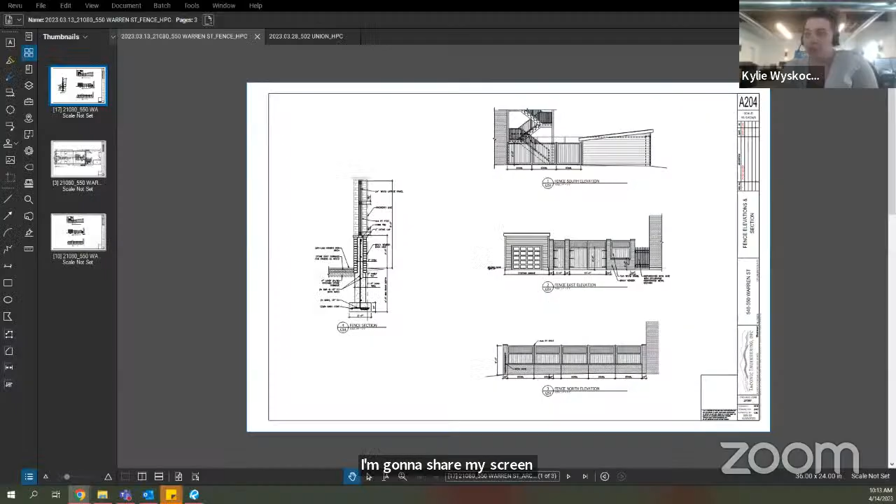That's unusual. Okay, tell us about the fence. I'm going to share my screen. So this was previously approved. The previously approved fence was brick and wood panels. This gate was in a separate approval. It's going to be the same footprint. We're just switching from this brick and wood detail, let me show you the footprint here. It's going to be the same footprint all the way around the backyard, but now it's going to be all wood.

So on this side, it was brick with a wood topper? Yep, okay. So it'll be wood from the building to the garage with no lattice. On the rear, it'll be 6 feet of wood with 2 feet of open lattice at the top, same design and pattern as before. And then same thing along the alley on the other side.

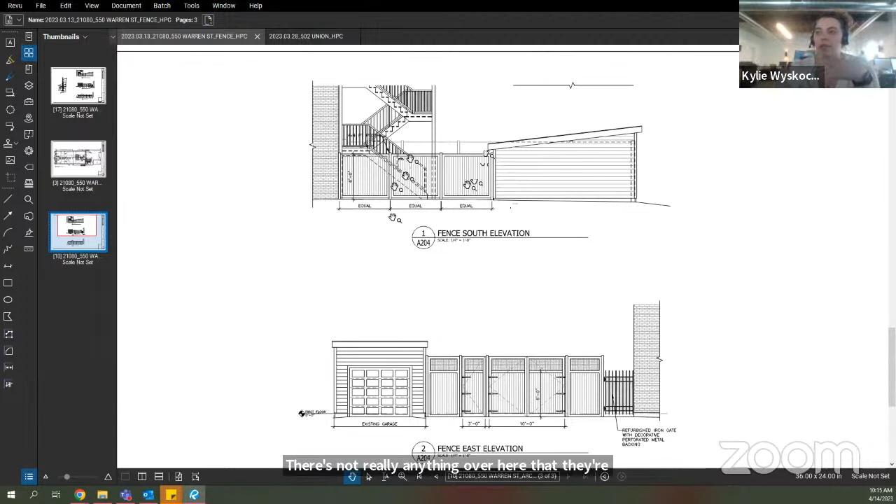I don't have a problem with it, I just have a curious question. Why is it 2 different elevations of fence type? Without the lattice, with the lattice? It's just in the height change. Just a curious question, because it'll interfere with the eave on the garage. Also, there's not really anything over here that they're trying to get extra privacy from. The neighboring property also has a fence that's pretty high over here. And the height is the same, consistent for the elevation.

The lattice is the only difference, right? Yes. Yep, same material on the bottom, all the way around. Any other questions or concerns?

If not, may I have a motion to find the application complete? Hugh and Miranda, all in favor? Aye. Motion to waive a public hearing and request the city attorney to prepare a COA. Kim and John. All in favor? Aye. Any opposed? None. Approved.

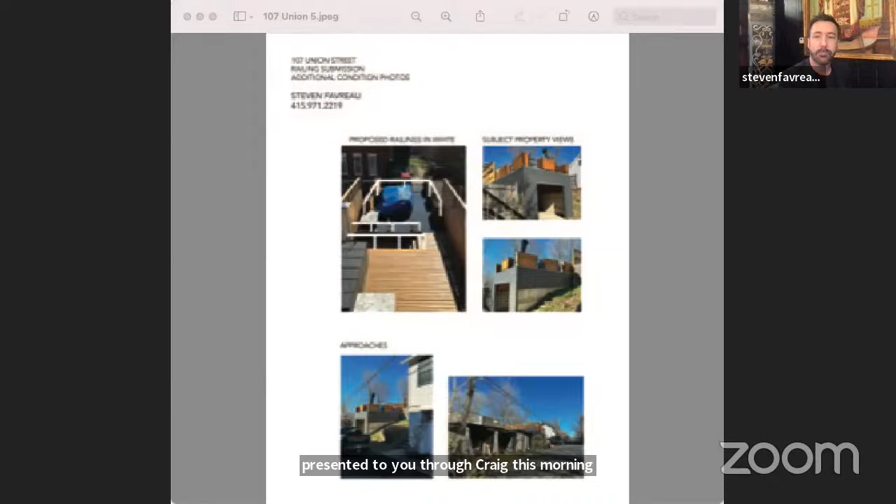So we had an engineer come out, Chad Lindbergh, and we have this plan that I've presented to you through Craig this morning. Can you zoom in a little bit? I'm sharing a screen here. Is this the page you want shared? You should have two pages that illustrate what we want to do in the back.

I think this might be the second one. There's also a line drawing. Is it page 4? Oh, yes.

Is there glass between those panels? What's between the poles? Oh, you're looking at the photographs? We're looking at the drawing right now. What are the materials? That's why I was asking about that line drawing page.

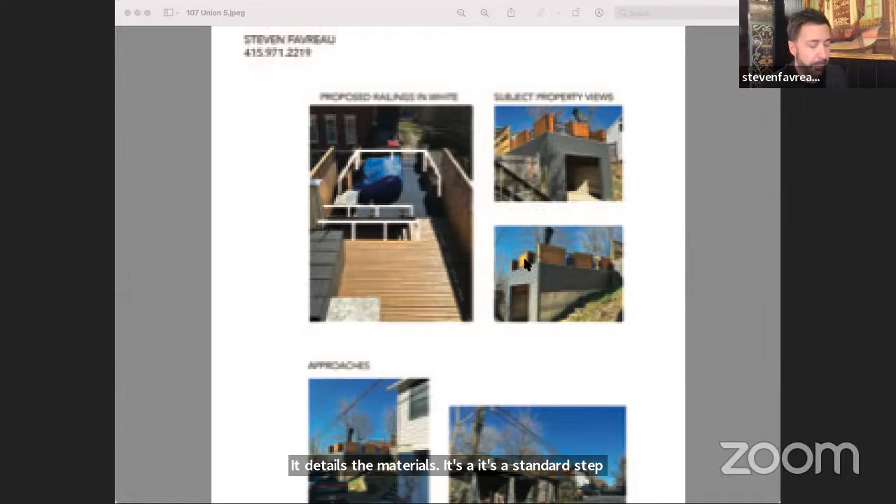It details the materials. It's a standard steel post and rail with steel cables stretched between them. There you go.

And the building is located where, approximate to the street? It's 107 Union, and this is the garage that's on the back, Cherry Alley. Yes, you were close.

No comments? Can you see the photos again, please? Just trying to understand what I'm looking at. Sorry, just a second.

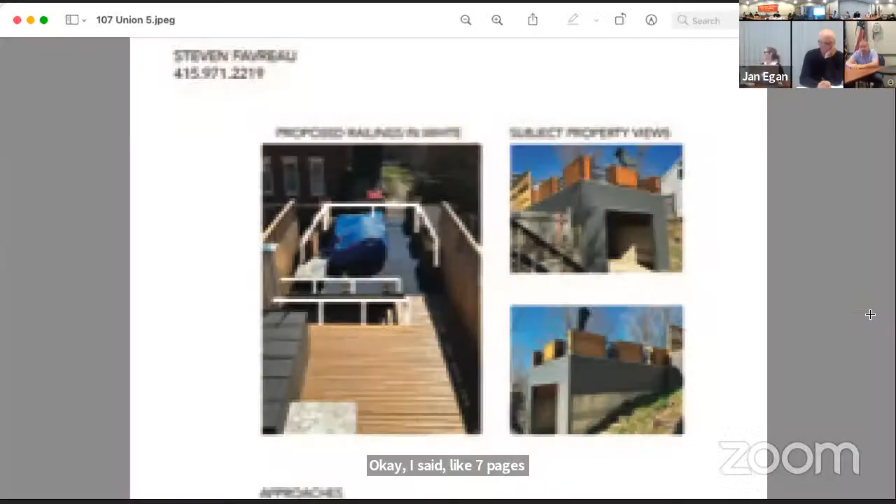They sent like 7 pages of this. Can you enlarge that one right there? Let me just... yes, okay, so it's not just the screen, it's low res.

Yeah, it's their suggestion. So what you're looking at there, on the right top corner, the gray building, that's the actual garage, and the brown planters above it were placed there as guards. We had actually stopped them and told them they can't do that, they have to create a rail. So on the left of that is what the rail is actually going to be.

I got it. And the material - they're going to put in a 36-inch high post with cable guards, we'll call them, 4 inches apart from each post. And it'll be white or black? Black. And the planters go away? That's right, everything you see in those photographs would be gone.

Good. So there's a staircase going up there with railings along the sides of the staircase, and also a railing around the edge of the garage, correct? Correct.

I think I would ask for the application to be submitted in higher resolution, because I can't read a lot of the text, and it's important to be able to read the text of the application. Well, I'm happy to walk you through it. That's what I'm looking at - I can't read what I'm in. Is my copy just bad that I got?

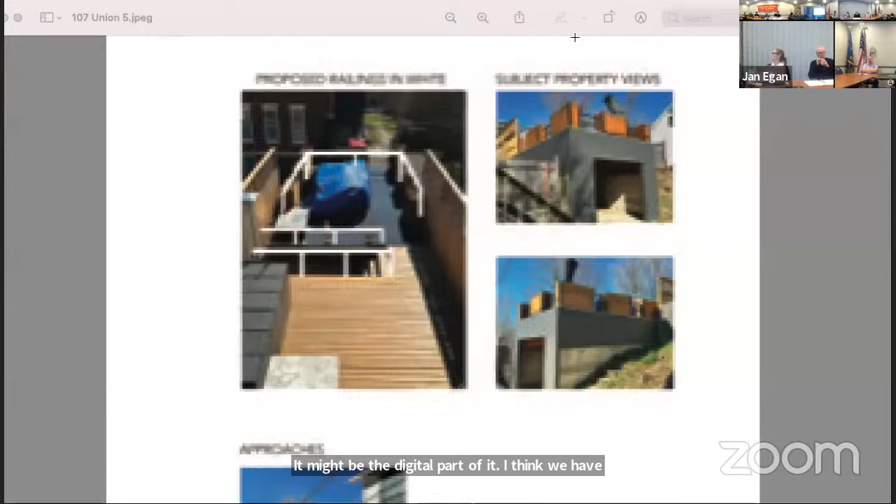It might be the digital part of it. I think we have it in our office - you have it where it's clear? A hard copy, okay, and we could always photocopy it. That's fine, I just wanted to make sure it was readable, since mine is not at all.

Okay, so the cables - there's a railing at the top and horizontal cables running between the posts. Are the cables black as well? They're more like a dark gray steel.

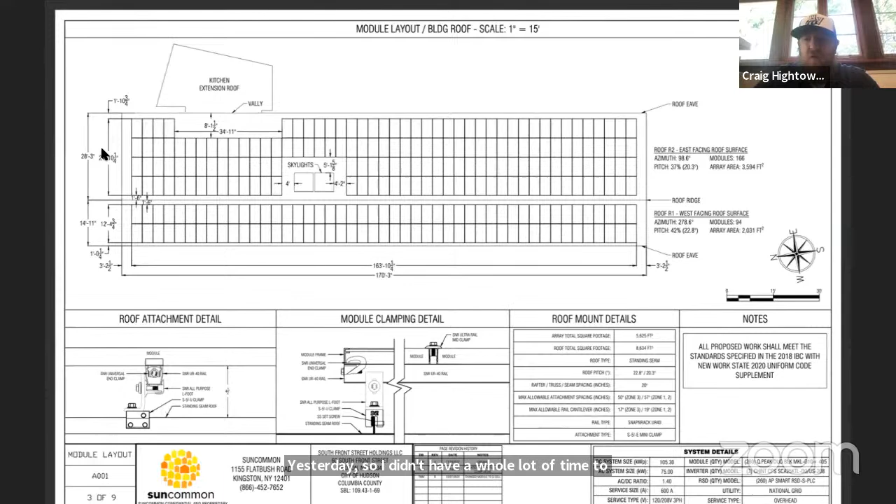No, I'm sure there is, but not that I have packaged up for this. It kind of landed in my lap about 4 p.m. yesterday, so I didn't have a whole lot of time to put everything together. I'm sure I can get one put together, but I don't have one at this moment. In the package I emailed, there is one in there.

Okay, next page. I mean, I think the commission has been historically friendly to solar panels. Over and over again, it's legitimate to understand what, for all the good we're doing, if there's anything bad at the same time. At the end of the day, we end up approving the solar, but the street view is going to be helpful.

Yeah, and I would want to just make sure that they're not reflective, being such a big plane that's huge for the neighbor. If you're looking towards the water that way, that they're not going to reflect back. I think typically they do not, but— Yeah, no, they're not, and that's an FAA requirement also, that solar modules are built with anti-glare materials. So these particular modules are black, they don't have any white coloring in them whatsoever, but they are absolutely anti-reflective.

This was the one that I emailed that was difficult to open. Yes, I have, so there were 7 or 8 documents, 9 documents. I mean, this is the building, here, this one's yours, and that one around, you can just hand it around. That's pre-renovation, that's the same. Oh I see, okay, it's a different roof now, but it's relatively low building, so it's visible. Okay, that kind of was the question.

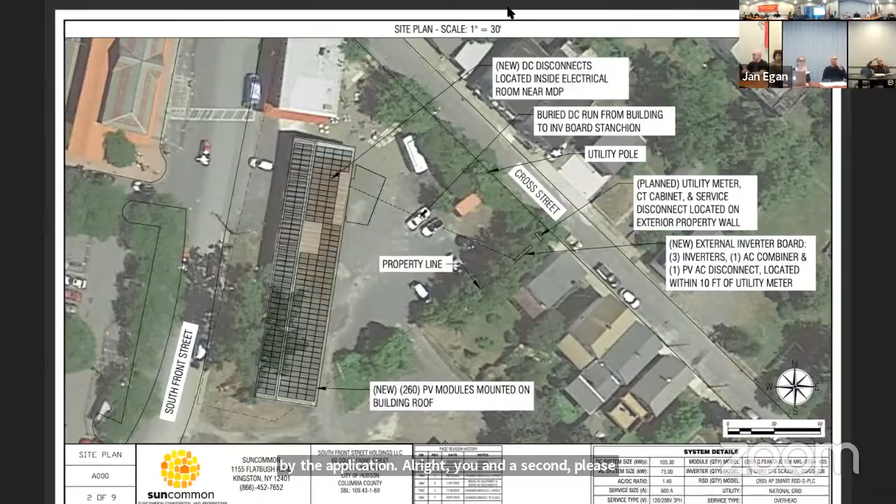Is it complete without that rendering? I think so. I think we understand this is going to follow the shape of the existing roof, and it will be visible. We asked about glare, which was asked and answered. I don't know what else is going to change. It'll be apparent to everyone that the roof is covered with solar panels. It's not going to be concealed in any way. There's no way to conceal it or give it a modern look given the relationship there.

If it's helpful, there is a page of what they look like.

So the first one, won't that be flat? There's a photo of them on other buildings. I think I know which one you guys are talking about. Yeah, it's this image here.

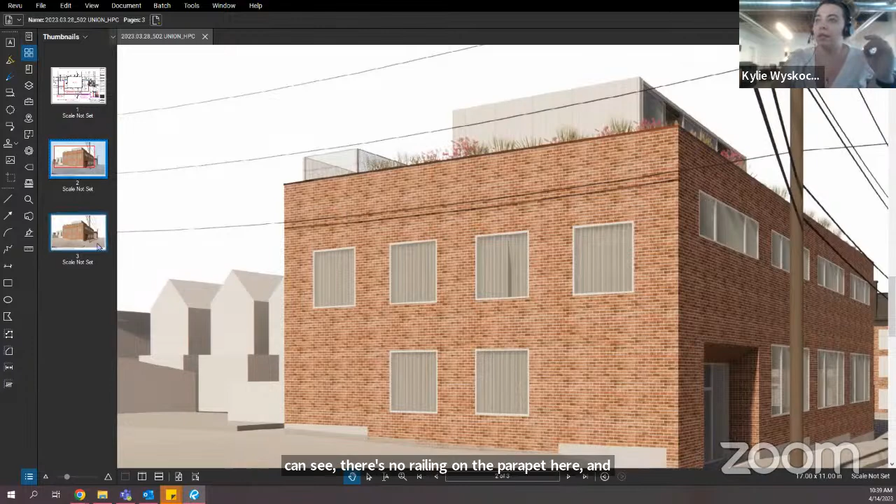So this was the previously approved rendering. As you can see, there's no railing on the parapet here, and you can see the green roof vegetation. This would be the new railing. It sits right on the inside of the parapet.

What is the railing? It's the same as it was before. It's just the metal rail, and then it's got the horizontal cables in between.

What's changed? Just the location of the railing on the roof. So originally it was set on the inside of the green roof. Now we're moving it to the outside of the green roof, and it's attached to the parapet, to the edge of the roof.

That's it? That's the only change is location? Yep, so same material, same height. It's just moving from the inside to the outside, so there's further coverage around the entire roof deck.

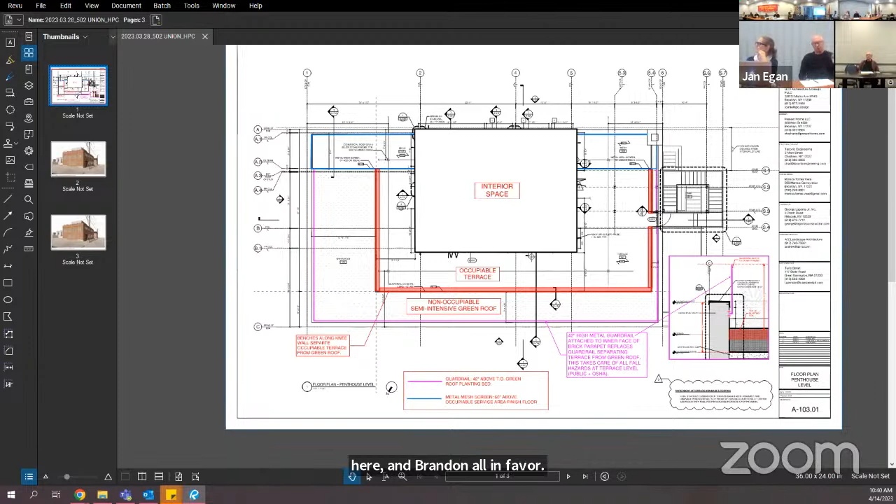I think we're good. Motion to find the application complete, by you and Miranda. All in favor, aye, none opposed. Motion to waive the public hearing, request the city attorney to do today. And Kim and John, all in favor, any opposed, approved.

Same thing as I tried to say before, two weeks. We vote on the certificate, and you should get that from Craig. We vote at our next meeting. Thank you. Awesome, thank you.

354 Allen. Hi. Hi. Hi. I'm Lithe Sebesta, and I'm presenting for the owner, Nicole Cherubini.

A proposed exterior renovation and the removal of a porch and deck stairs from the upper story and the reconstruction of a mudroom, all on the alley side. Do you want me to show you contemporary photographs first? If you could start with photos and get a sense of location and neighborhood, that would be a great way to begin. Okay, wonderful.

Here are the photographs from the front side of the house. It's on Allen Street between 3rd and 4th. The front facade of the house would remain untouched, with the exception of the replacement of the windows, which are in need of repair.

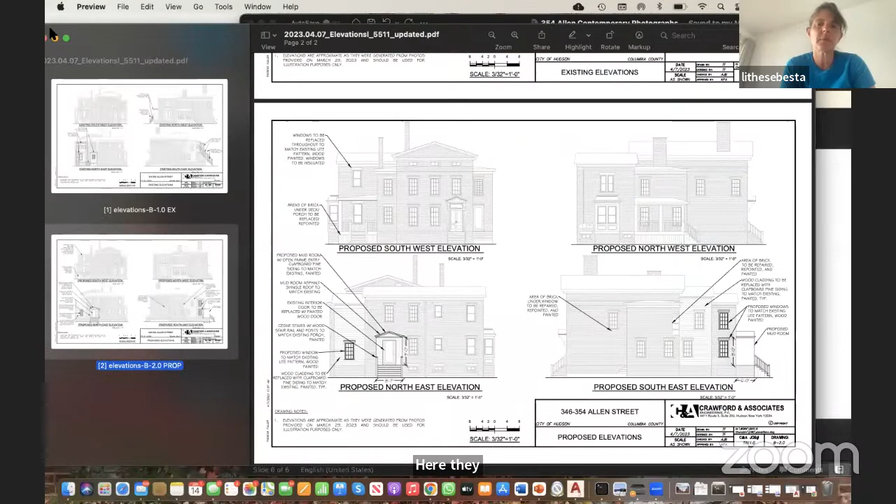Here they are. Let me zoom in on the existing elevations. This would remain as is, with just a replacement of windows with a matching light pattern.

The same would be true of this facade, save this mudroom, which currently has a side entry and was likely built on at the beginning of the 20th century. It also has some foundation issues. This is the existing mudroom configuration, and this is what I'm calling the bump out with the exterior deck.

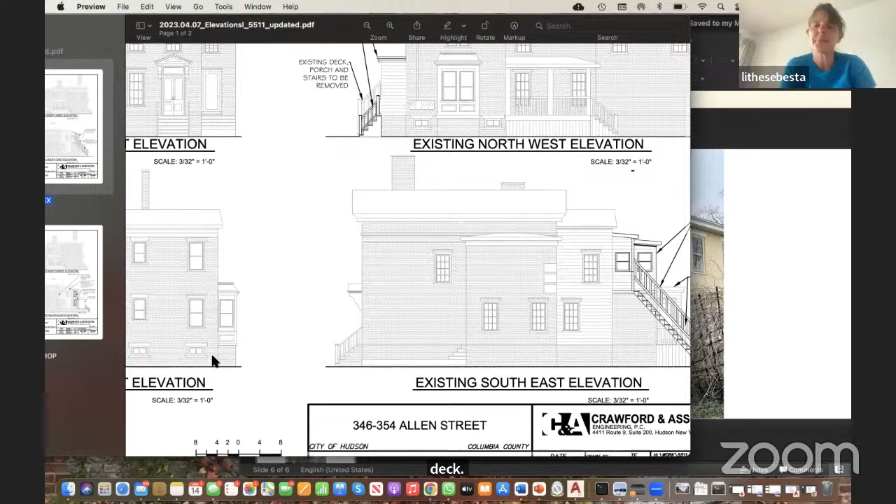So when you mentioned replacing windows, you're replacing windows throughout the entire building? Yes. And when you said you're going to match the existing lights, it's not just the mullions and the muntins—they will appear as they are now, just modern windows? That's of course very important to us, that it's replace like for like.

Those windows, I can't tell from this distance, are they 2 over 2? No, they're 6 over 6. So there's a portion of the house that is 6 over 6, and a portion that is single hung. They'll be replaced to match existing.

Replaced to match existing, I understand. So just for confirmation, if it's 1 over 1, it'll be 1 over 1. And if it's 6 over 6...

Exactly. And when you say replacement, are they full replacement windows that you're going to install there, to Kim's point? Correct. So you're not modifying the opening to accommodate the replacement windows? No, same opening, same size, same light pattern. Wooden, painted to match. There are simply long-term significant heating and cooling issues in the house as a result of windows that are not functional. So it's an opportunity to upgrade but maintain historical correctness.

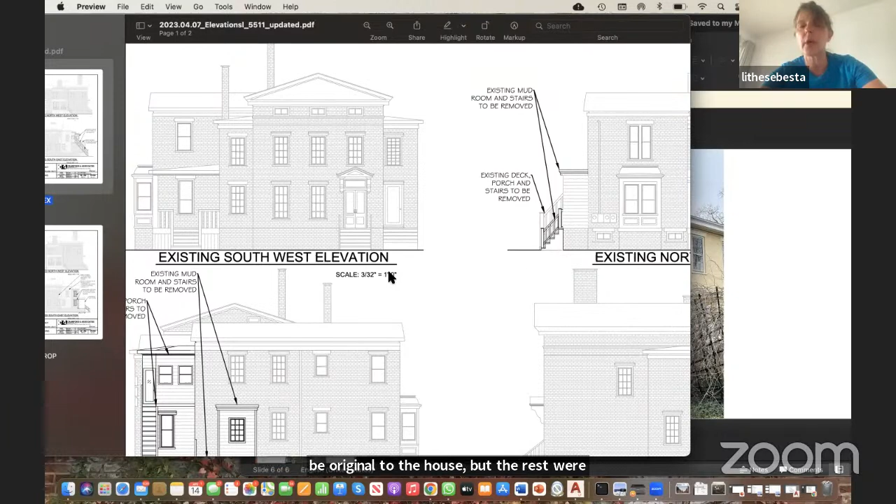That's interesting, because the double hung 1 over 1s—you have the opportunity to have them be 6 over 6s, if the originals are 6 over 6. Exactly, yes. So my question is, what is the condition of those? I think we need to evaluate them separately, right?

So if there's original windows—we very much understand the importance of the environmental impact to the house of having new windows, it's great, but there are other things to do. So have you evaluated the condition of those original windows to determine if it's an option for repair?

Yes. I could jump in right now, sorry. I just wanted to talk about when we first did the work on the house, we repaired each pane. This is Nicole Cherubini, I'm the owner.

It's a very hard thing for me to think about losing these gorgeous windows, and I agree that if we could save them, we would. We have done extraordinary measures to try to keep them, and heating the house is incredibly hard. This was not an easy decision to come by.

Have you considered storms for the front? There are many excellent storm windows that can go over these windows and give you a better heating opportunity in the winter.

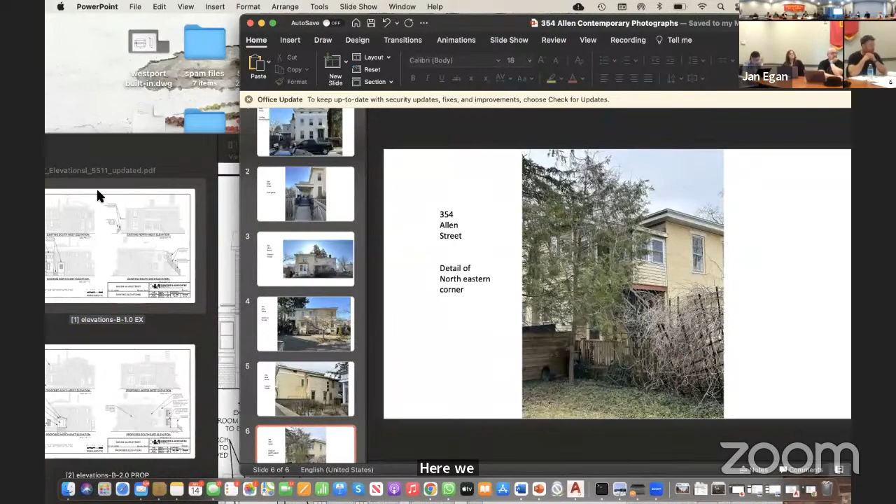As you can see, this is not an original window. But the facade of the house, which I show here, you can see these are.

As John mentioned, there are a lot of different kinds of storm windows, including ones that are single pane with a push-awning out style that you can open. There's a good example of that on South Fifth Street. And on Union, isn't there a good house that has those as well?

The house next to mine doesn't use that. Oh, they don't. John, on South Fifth, just around the corner.

Was that clear what the commissioners were saying, that for storm windows, single pane, many are available with a hinge and push out? Yes, I do. So that air issue is no problem, and you get to keep your old windows, and you'd lose those triple tracks that obscure the windows. It would really be beautiful.

What about the bump out on the left? Are those original or not original? It's in the photo, sorry, I'm going to pull back the facade.

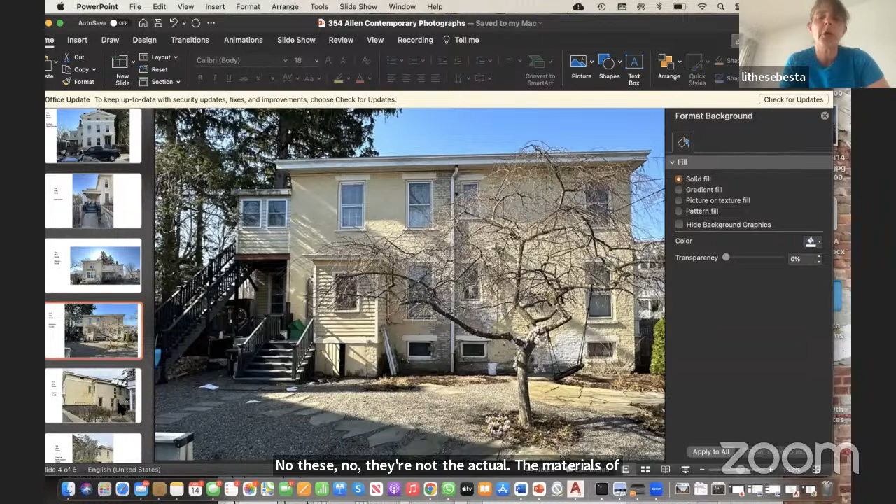Let's go back to this image - not those, this side. No, these - the materials of them are not original. The only ones that, to our knowledge, are original, meaning dating to the time of the building of the house, are the ones on the front facade. The rest were replaced higgledy-piggledy over time.

Right, the front facade is 2 planes - the 5 on the foremost plane, and then there's some setback. Are those also original? Those two you have added on - oh no, those have been replaced. So the only original windows are the 5 windows in front.

Which have been somewhat restored, and you could restore them more fully. It sounds like Nicole agrees that's a solution that would satisfy both her and your concerns. We'd love to hear from you or the homeowner that it's accurate that those are the only 5 original windows, as far as you know. As far as I know, yes.

And what about the eyebrow windows? Those are new, the ones on top, correct? Yes. When we bought the house, those were actually plywood, and we replaced them with plain white framed windows to match the rest of the house.

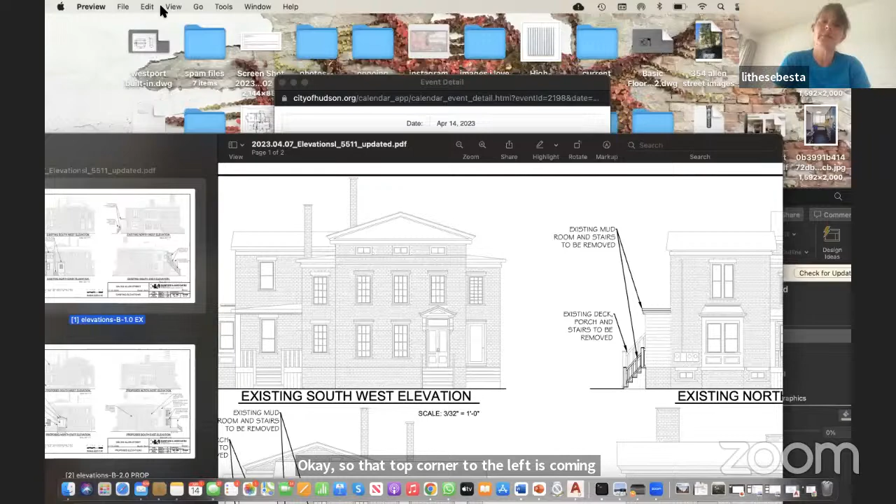So these are the existing conditions I went over before, and the new conditions would be the removal of that bump out, which you can see here. It would essentially remove the porch from this section and allow it to be reclad in wood to match existing, and to reroute and rebuild the mudroom with a more operable stair and access—shown here in a small image of the new mudroom, which has a roof profile to match the frieze at the top.

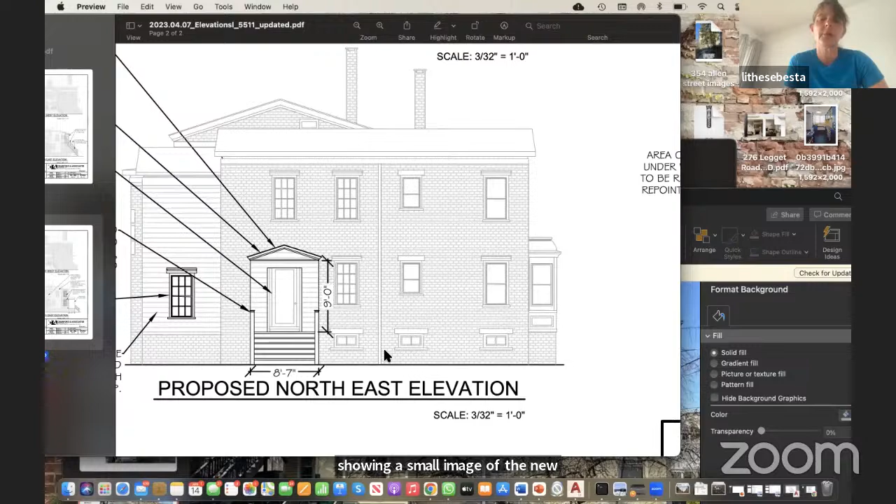Do we have specs and materials in your pack on any of the new material going on? Yep, it says essentially here: cedar stairs with a wood stair rail, and new pine wood clapboard to match, painted to match existing.

So you're not introducing quote unquote new materials that are not on the house? Nope, and no, all the materials described are wood? I beg your pardon? I'm sorry, I couldn't hear you. Everything described, the siding, stairs and stair rail, are wood?

Correct. Thank you. And then you're talking also about replacing all the windows that we see here with new windows, with similar lights, wood windows, right?

Correct. Yes, we can do that in a separate meeting or a separate application. I think the applicant said they would be agreeable moving forward simply with the bump out and the resolution of that in the stairs, and we could come back and address the windows in totality if we want, Brenda.

Sounds good on our end. So it's the demolition and the rebuilding of the mudroom? No? Yeah, correct. Demolition of the porch and stairs. Right, hang on a sec, folks.

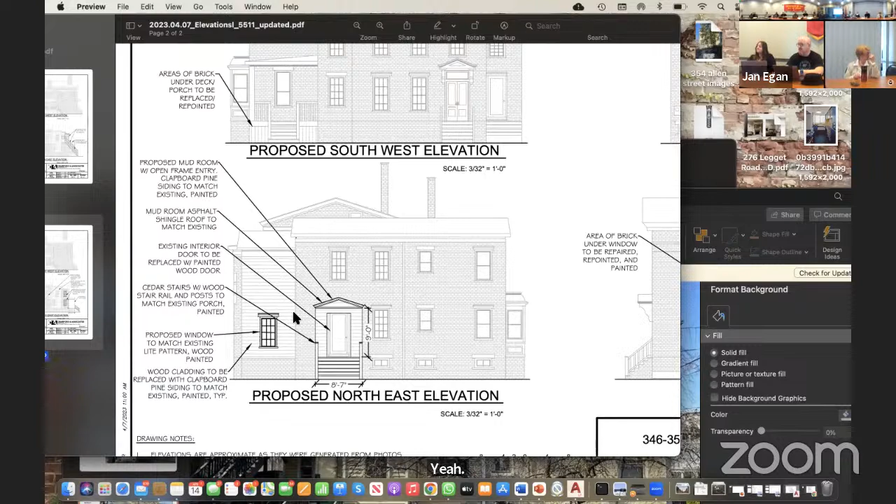The application is for the renovation of removing, rebuilding, adding and changing windows. So you can't give a Certificate of Appropriateness on this application unless you modify it to be specific to what you're approving. We do not have a detailed drawing of the construction for the add-on, we only have it for removing. So for code purposes, I need a detailed design of how we're gonna build this add-on back. We don't have that, we don't have any detail at all.

You're talking about the mudroom. The mudroom to get put back on. Isn't there also an addition where you're getting rid of the second floor thing, building something back there, that's two stories, right? No, the bump out with the porch and the stair from above is simply just being removed entirely.

So for the purpose of this, just move the demolition. We don't know what's going on, we're not talking about it, we're just taking it off, they can't do anything after that. Greg? Yeah, if that's what they wanna do, the only thing you can do is approve, because the way the code is written, you cannot do anything without approval of the C of A. So they would have to have a C of A to remove what they're requesting.

That's it, relieving pressure on the house that we're talking about. So they can't rebuild anything. Okay, is that clear where we're heading? We're saying that we could probably grant you a C of A on the demo, and that's it. You'd have to come back with more specs on what's going on.

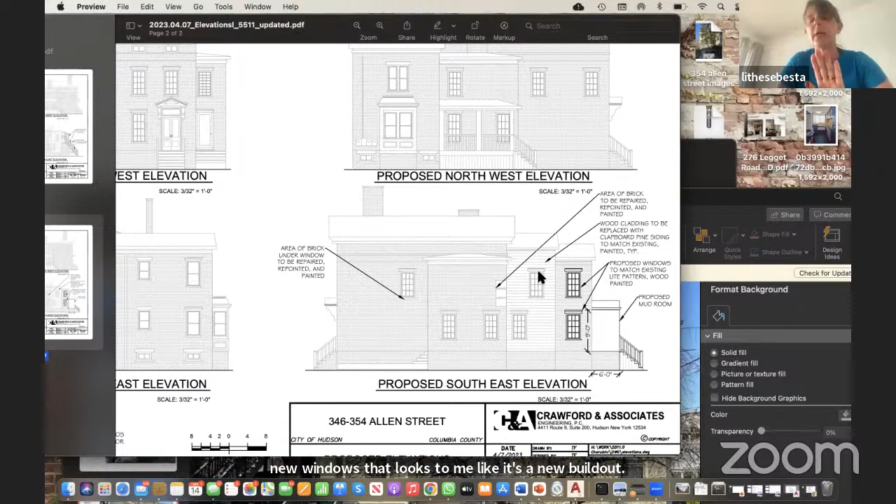Here's what's tricky about it. There are... these are all set, they're all stacked and set back slightly. So if you look at this facade, I understand why that feels funny. When you're looking at this facade, you're actually seeing this, it's actually this, if that makes sense. And this, the wooden section, is this. So this is actually the original brick section, which right now is obscured by that bump out, which comes from up here and goes down there.

Okay, I think that continuing, I follow, it's beyond, and that's why I misunderstood. So thank you for clarifying that.

Absolutely. Okay, so if you're good, we're gonna propose that in this meeting the commission is going to approve the demo and nothing but the demo. And you're gonna come back with whatever other stuff you want to do in more detail next meeting.

Sounds good. We've also collected photographs of the windows, try to get a sense of some of the other windows and how that relates to the windows in front. Okay, yep, sounds great. Thank you, thank you so much.

Well, we gotta vote. Okay guys, any further discussion? Are we setting it up? We're not setting the application complete, we're just voting on the demolition. We're voting on preparing a certificate of appropriateness for the demo only. Quick question though, mainly for Victoria, because the application that was submitted is for everything.

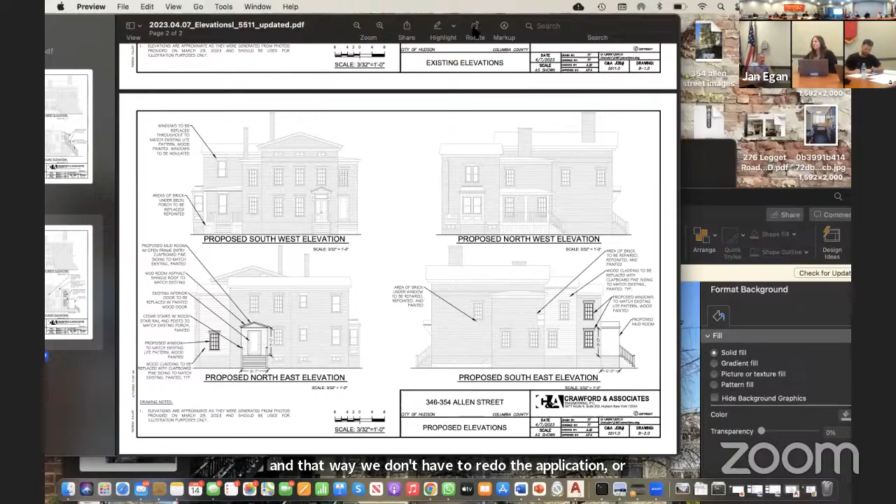That piece won't be available until two weeks. If they wanted to move forward to get that pressure off, I can approve it based on the minutes of this board. If it was an emergency, I would have had them do it before this, but that's my whole point, time is of the essence, maybe not.

That seems a kinder solution. We're asking these guys to come back with everything else. If they can go ahead with the demo, I think it's a game changer for them. But won't everyone want to just use the minutes then? Yes and no, it's a good point, but that's totally up to you. The only reason I'm saying it is because they submitted their application for everything.

If the application would have strictly said demo, we wouldn't have this conversation, it would just be a C of A for demo. So that's up to you, however you want to do it, doesn't matter to me. In the past we've done these partial ones where the applicant has to return, but if you want to issue the permit based on the board's vote, we still have to vote on it for the demolition portion. Okay, so let's take a motion on that.

Motion to go forward with the demo and the demo only. All in favor? Done, and we'll see you in two weeks.

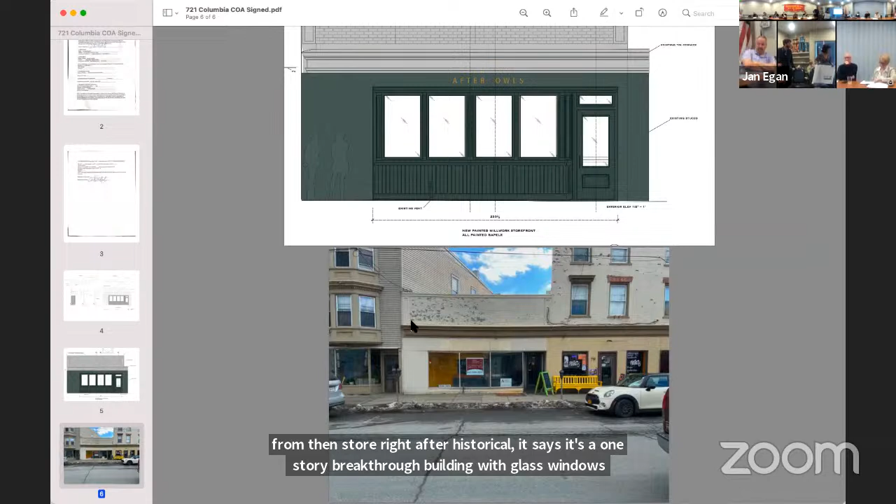This particular property is the corner building on Park Place in Columbia. It's 3 different parcels, but all attached, very popular. So it's a standalone parcel, but it's an attached row building. Very Hudson. Exactly, a Hudson moment here.

And is your proposal to paint the stucco? Well, actually, we would like to repaint it, but not like a mid-tone plain color, not the green that you see there. We'll probably be re-stuccoing, because the actual hole will be different. So there will be some re-stucco and we'll have to paint it so it looks more finished, but it will be like a mid-tone plain sort of cement color, similar to that new color.

The reason I'm asking is because it does feel like it's part of the adjacent building, and there is a datum line that stretches across it. I'm looking at that, and that's why I'm bringing up the question. Oh yeah, I mean, this does cut off here, and we show this painted, but none of this stuff is gonna be painted actually.

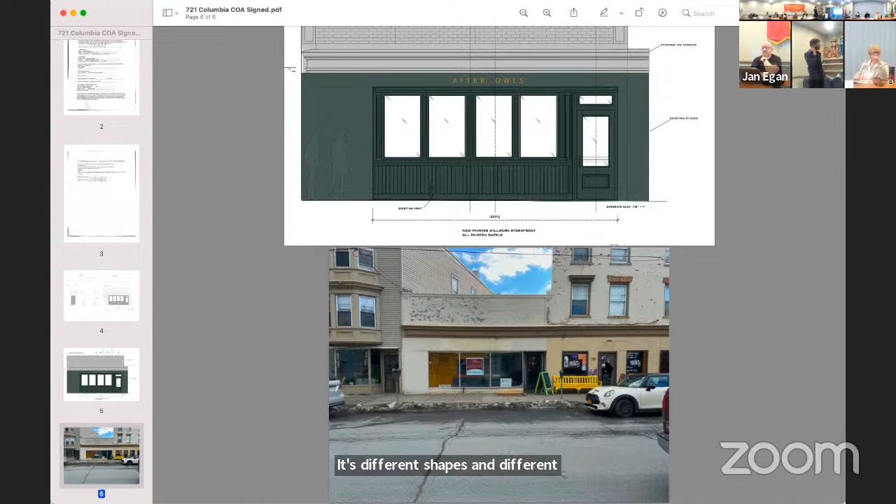If you look at the photograph in the packet, the building to the left of this one also has the bay window and the embossed wooden trim underneath the window, which - I don't think anyone thinks of that building on the left as part of this one. No, but what I'm suggesting is that this treatment with a wooden lower part of the window fits well with the building on the other side.

My question wasn't so much - I like the design, I think it's really beautiful, whoever designed it - it's just about the actual opening. I'm pointing out the height of it, because I think that's a nice datum line to see how it continues to the other building. I understand it's not related to the building on the left, but they don't read as being similar at all.

Are you talking about where the door is? No, in the photograph - the windows. Not your rendering, the photograph below. You see a natural horizontal line at the top that continues to the adjacent building on the right. There's a language to that, I think, and you see it in the cornice as well. So I'm just asking if there was an opportunity to make it the same height, that might be nice.

There's a choice to make the windows a little bit taller. How much taller do you think it is? I'll give you - we have some records, but I don't know if we have the original measurements to tell you the exact original height, so...

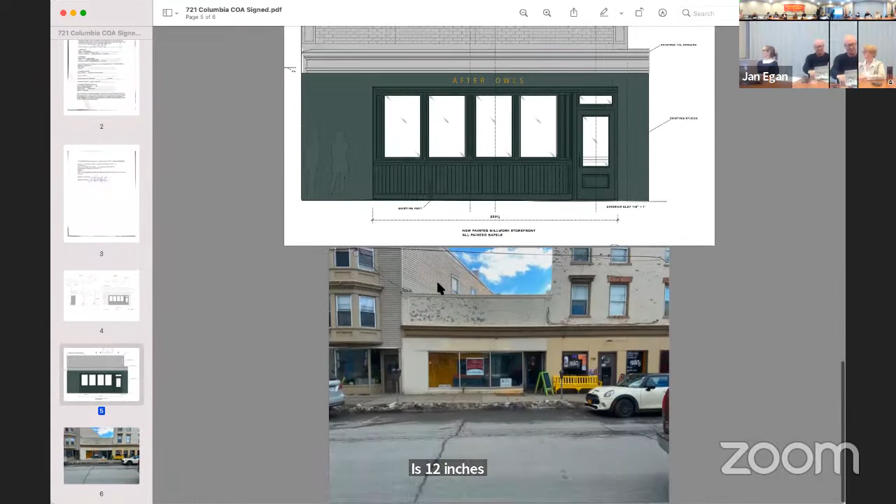It's 12 inches, 12 and 3/4 inch. So it's probably about 5 inches. I mean, 4 or 5 inches.

I don't know if there's something to stake a flag in the ground about, it was just an observation to create conversation. The existing window frames right now are metal, aluminum maybe. I would say they're a strong metal. And you're going to all wood frames with trim.

Single pane glass? All I know is that it's going to be tempered. Reading across horizontally, will there still be 3 or 4 different panes? There'll be 4.

Does anybody care enormously that the roof line, the window line, is no longer going to be consistent? It's not, I don't think I care. It's a separate building, it's a better design, we're in keeping with 1850 rather than 1959. Significantly better. The architecture has changed, so you don't even relate them. And that building next door is slated to be redone.

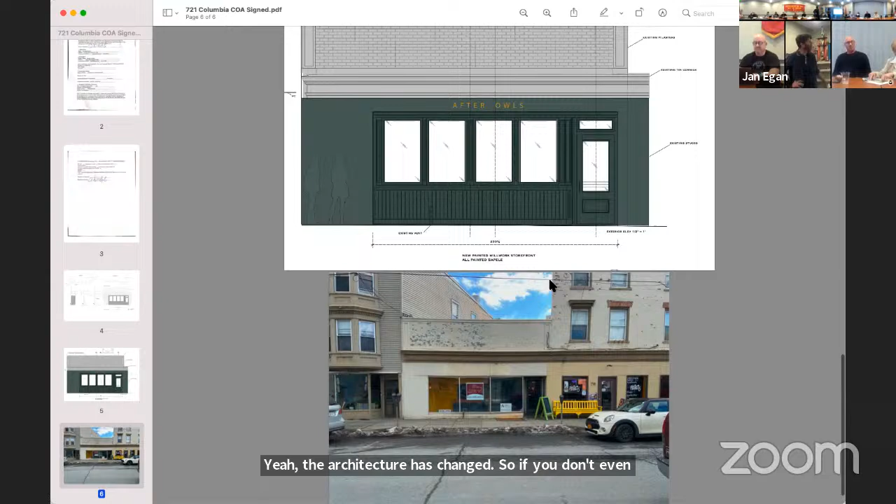Well, I think this application is complete. And you're keeping the cornice, yeah, and the high pilasters above the cornice. And the top part, we'll just redo it so it looks true to the original. Motion on the application, complete. I'll make it, Craig, seconds. Craig.

And what is, After Owls? Oh, I didn't see the sign, it's changing. Nice, I like the sign. Is there a sign in this? So we look at that. These are the brass letters that are going to be installed.

No lighting? Oh yes, we want to have just a drop down pendant, like a globe, an antique globe, over the door, to call out the entrance. The door, it's hard to see in this picture, but the door's not flush with the side, it's set back.

4 feet, 3 feet recessed. Could they bring us a picture of that lamp and we could approve that? We have it, we can show you. The sign won't be lit, no.

There might be, we might apply for additional signage down the line. I understand, but the brass letters on the wall are not a problem.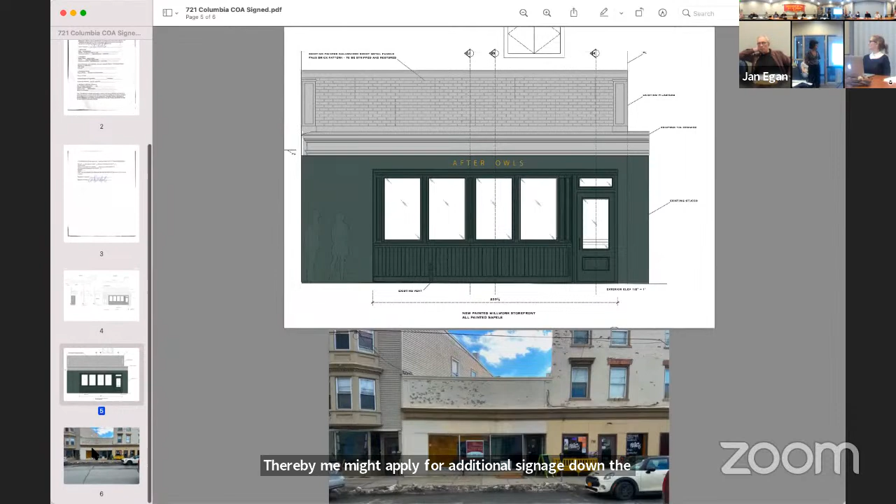I vote yes, whatever we're voting. Assuming there's no problem with it when it comes in, we have a motion, the application is complete. Miranda, all in favor, aye. And a motion to waive the public hearing and ask the city attorney to prepare a COA, assuming there's no problem with the land. Sure. Miranda, all in favor, aye. Okay, let's take a look at the land, we'll move on.

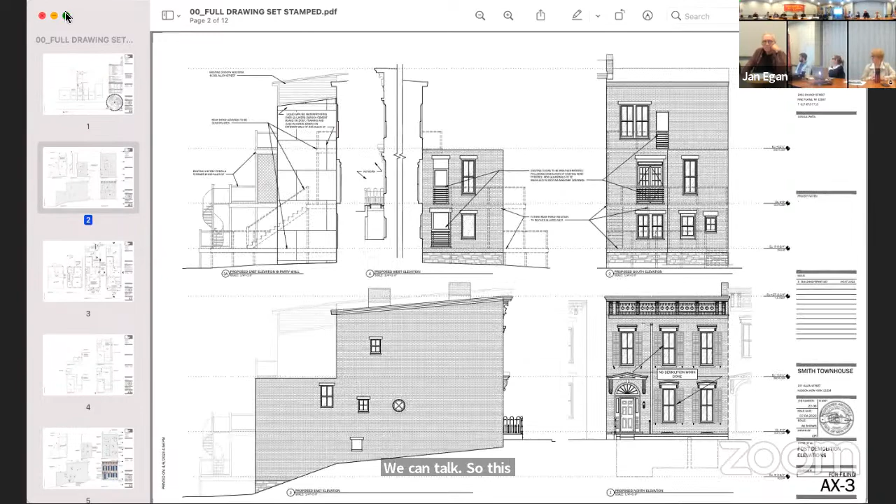Okay, so this is the existing conditions. Once we remove the rear deck, this is what's left of the facade. So we're gonna come back and show you what we'd like to do. And the front facade, we're pretty much unchanged. This is the interior package.

The house originally had an areaway on the street with a railing, so we would like to restore that. The windows actually are still down there. And we have a deck design that we'd like to show you for the rear, and a window strategy. So it's the door, the areaway, the deck, and the window strategy that we're going to for this time. I guess we'll go to the next one.

I'm gonna skip this one and keep going. The facade, we'd like to clean it up here, remove that doorway, which had a fan light that was put in, must have been the 50s or something. The original door was back about 30 inches. That is still there, so we'd like to restore it and expose it back to the exterior door.

This railing is missing right here, and we're gonna need it because there's an areaway going down. Parts of it still exist, and the neighbors have parts of it, so we've identified some fragments that we can purchase to put this under.

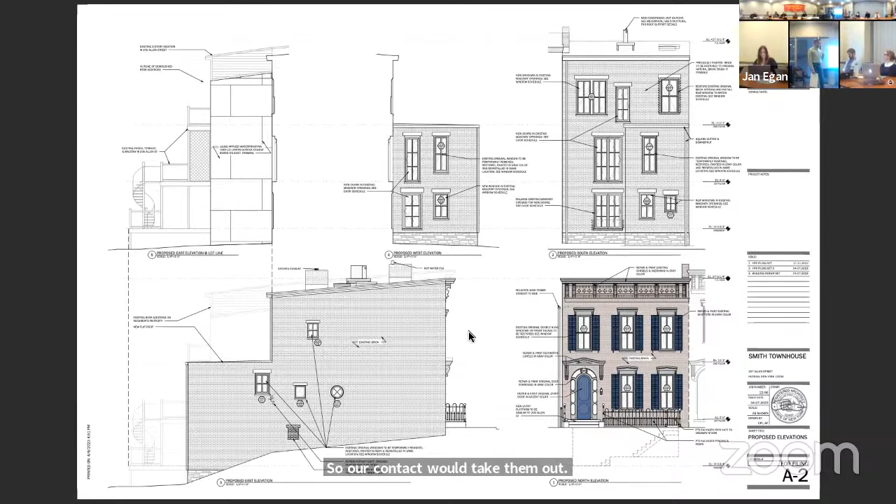This would be the window strategy on the back. The deck's not shown here because it's hard to go bigger than the deck. But about 2/3 of the windows we can restore. They're nice full wood windows with the weights. They're single glazed, so our contractor would take them out, double glaze, and bring them back. The muntins and the sash are thick enough to hold the double pane. So almost all the ones on the front will be restored.

This drawing also shows what we'd like to do for the deck. The owner would like to bring the deck out at the lowest level because it's a significant grade change in impervious here, and the rear yard comes here and drops down, and it's a really nice view, the mountains come up here. So this is a multi-level deck, which we'd like to do in steel and wood decking, and it steps back and has a staircase going up to the second level.

On the upper level, those windows, some of those were bricked in. This one was bricked in. This one is there. This one was cut to get into the rear addition, which would be removed. These are windows we'd like to drop into a French door. Same thing. So these are all pretty much there, either restoring them or putting in new ones.

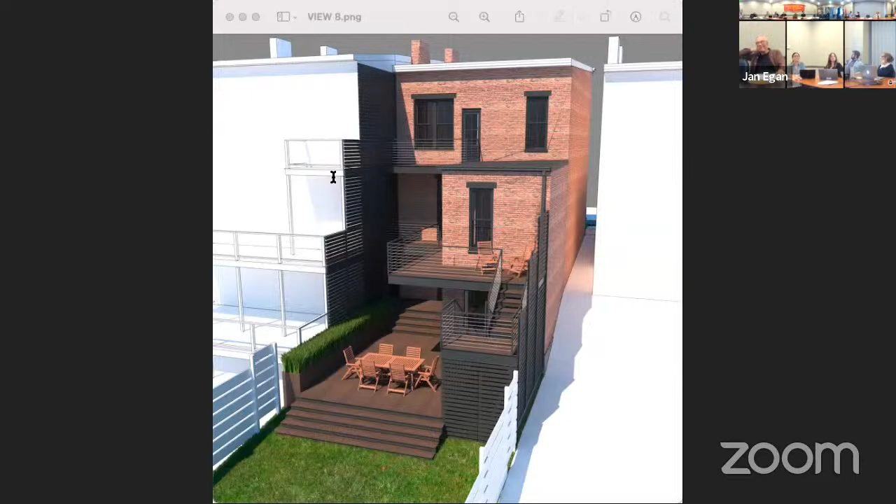Yeah, that was a nice shot. You don't have the structural drawings yet? I wanted to get some briefing on the concept and then release it to the structural engineer, the design and the colors.

Would you need the actual structural drawings submitted to this board or just the building inspector? Only if the structurals involve alterations to the exterior. So if the structural drawings affect anything required by 169 of our code, yes, they have to review them as well, so we would need...

Some of these need to be bracketed off the wall, and then we're gonna need some posts holding up the staircase, so all on this property. So that's... I reckon that we're not quite complete. Certainly we can comment on the concept, but I think everybody's gonna like that. We actually need the actual specs, actual structural drawings, for the exterior.

We don't need anything on the interior, but Greg does. We're just exterior. Yeah, we have a structural engineer, I just didn't release him. And materials list, but certainly, okay.

Is the fence existing? There is a fence there, I guess. You mean all the way down the lot line? There is a fence there, yes.

That's beautiful. So folks, what we just said, we're responding now from a concept point of view, because there's additional information coming, and additional specs that we've got to have. It is beautiful and it's gonna be beautiful, thank you.

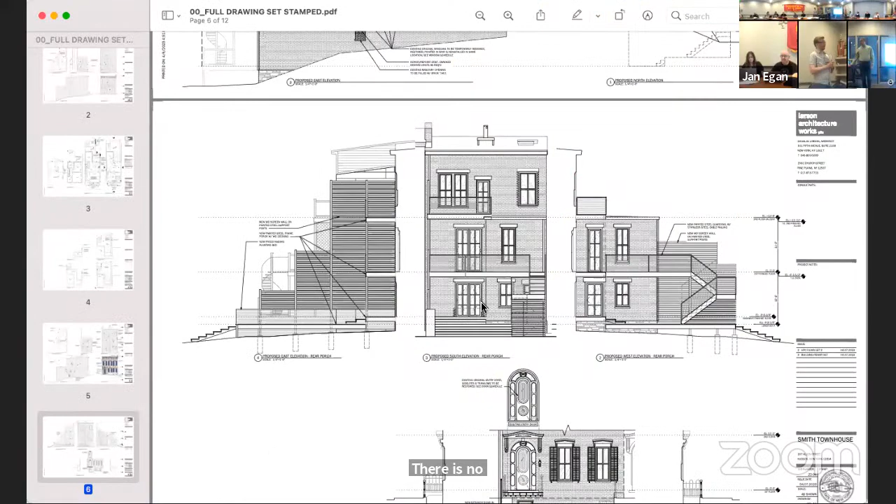So I think if you show a model for the staircase, like a neighbor model, there is no real neighbor model. There is an existing staircase there still, but it's not good quality, it's just wood. We would put in a steel staircase because it goes in front of one of the windows, so we want it to be like an open riser slab and steel staircase.

So I guess we can go to the next drawing. So here's the window schedule, which specifies which windows are being restored and which ones are new. And we can go to the next one, we have a door schedule, which ones are being restored, which ones. We have some of the interior doors on here as well, so it's not just exterior.

Electrical plan, you can see that.

These are all just showing how the areaway works and how we get across, and the footprint of the deck. And then we'll talk about that. So the earlier drawing I skipped was the actual deck drawing that we're gonna develop.

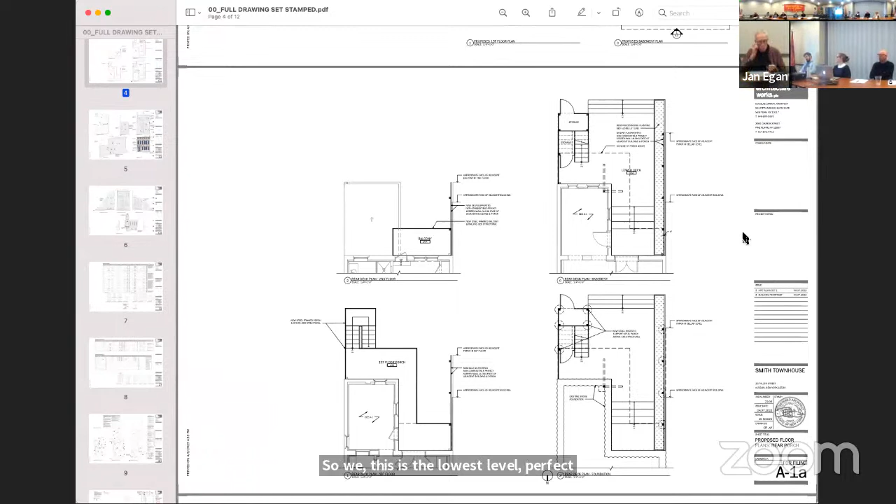This one right here, so this is the lowest level. The French doors would be here, we come out a few steps and go down to that lower terrace where you saw the dining table. And then this would be the staircase with storage under, going back up to this level, which is the main dining level.

And then above that, this is that balcony that's sort of wrapped around and breaking the staircase down. And then the little one at the top, so it's multi-level, held up with brackets and posts.

Going back to the front of the building, that entry platform you're building similar to the neighbors, the two on the street, what is the material of that? The other neighbors just have wood, painted wood, tongue and groove boards. So it's two risers up.

Originally it was probably a giant slab of stone, and there's several - we went around Hudson and there's several in Hudson that just have a 6-inch thick, 4x5 piece of stone. But I think that's just a little too hard to execute in this day. Very well.

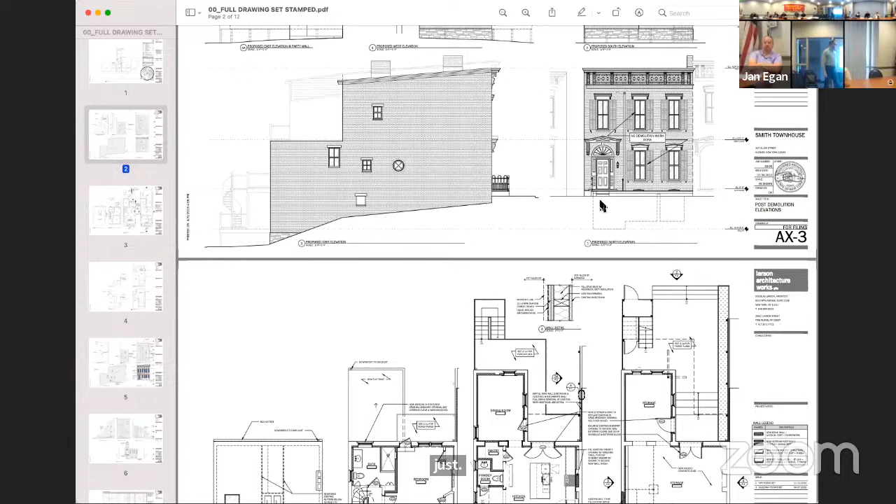Currently there is a wood platform there, but it's got plywood as the surface material. Out here? Yeah, if you go to the photograph - I should probably see a photograph, which is a different filing - that one over there. The temporary photos.

This is gonna be beautiful. Absolutely, it is. Where'd you find the door? It was just hanging out in the basement? No, it's back there - if you take that blue door, it's still back there. It was an airlock. Got it. So you can see it's still back there.

Okay, go around the fence. So here's the two steps up and the fragments of railings that are left. There's another fragment over here. And this is just a piece of plywood with rolled asphalt roofing on it and two skylights. Everybody seems to have a version of that from that time.

The neighbors have treated it differently, so we'd just like to put it back and get some daylight into the front or the lower level. So will the doorway be recessed then? There'll be a little vestibule in front?

Yes, the brick is actually chamfered. As the brick comes around, it's chamfered, then it's flat where they inserted it, and then it chamfers back again. And there's these two jamb panels that actually have the same circular moldings on them that match the door. Yeah, so it's all back there, we just need to fix it.

There you go, that door to the right, that's an outer door and an inner door also. That looks original. Doesn't look really original to me, the rails and stiles are way too big.

There's a lot of doors that are like that in Hudson that are not original, they put them in later. Well, that would be verifiable, but I think that might be something for you to have researched a little more when you return. That would be my thought.

I think it also would be sort of a shame to cover up that beautiful door that we want to expose. No, we're not gonna do that. I think if you go around Hudson, there are several of these exterior vestibules.

And it has the number on it, which addresses exterior. It'd be great to have a picture of the door and a picture of the railings that you're using as inspiration, it would help put it together.

Well, the railing, we actually have pictures of the antiques over there. We'll get details on the railing, we'll try to see if we can get a historical photograph or precedent for the door.

And then we'll have the structural drawings figured. That would be great. Come on back and see. That's a great concept, you're doing really nice work. Thank you, all right, thank you.

Well, what's your building number that you're using? 548 State Street.

Bill, you have a raised hand online, or do you want to take a question now or later? It doesn't matter, whoever's up. Ron, if you could be brief. I haven't unmuted. Go ahead. Yes, this is Matt McGee.

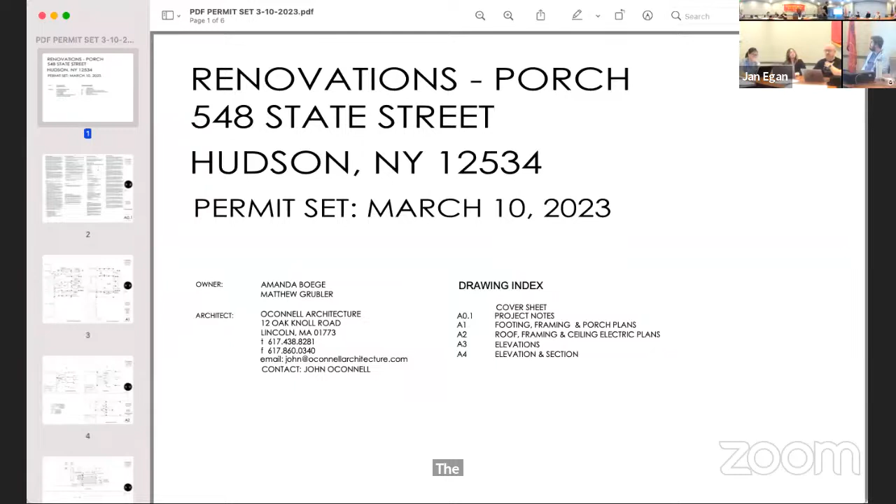They're putting, instead of wood... they're putting PVC. So the architect had put PVC on everything, but it's not accurate to the material we're gonna be using. We're gonna continue to use the Hardie board that is currently on the house, as well as match the UK decking. You're gonna have to get those up there. Okay, yeah, and that'll be the condition. So they have hardy board trim? Correct, and hardy board, yeah, on the house right now we have the hardy board, we're gonna continue to use that just to match it.

So it's gonna be just a little water. Is this where you're talking about them? Oh yeah, okay. So right here you can see the footprint of the existing structure and the existing deck. And then what we're gonna do is add some footers and extend the deck out this way. This line right here notates where the screened-in porch area will be, and then this area will be screened.

You see there's 2 skylights, they sit up really high. Are they raised like that? Such a shallow roofline that we can't put skylights in unless we pitch the roof, otherwise we have water issues.

Are we the only ones with these drawings? The skylight should be looked at, they're gonna be pretty pronounced. That, it was in the PDF permit set that we got.

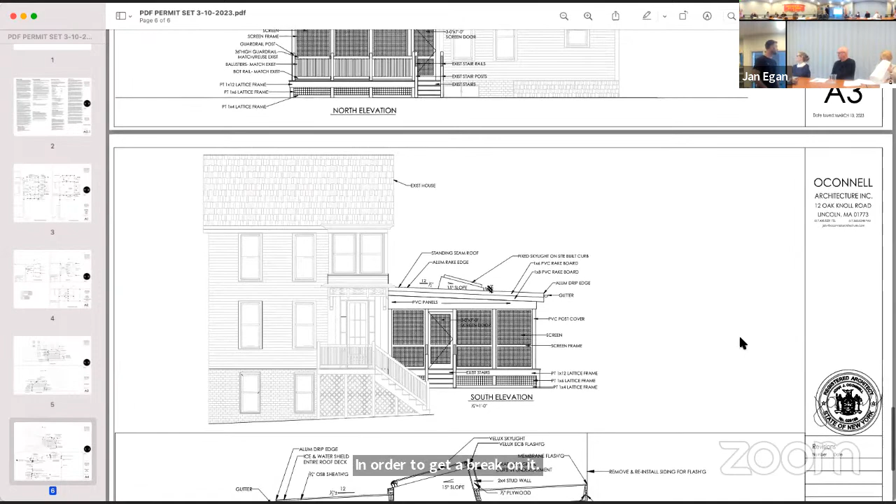And then that offhand, but it's probably with that pitch, maybe 18 inches. That's it, well, maybe a foot. But yeah.

And this works for setbacks, Craig, like the width of it and everything. Yeah, they have plenty of room.

I think it's 12 and a half, so 15° slope. Pretty shallow, it's very shallow, almost flat. Unfortunately, I'd like to pitch it more, but we can't because there's existing windows on this side.

They're like the corner and...

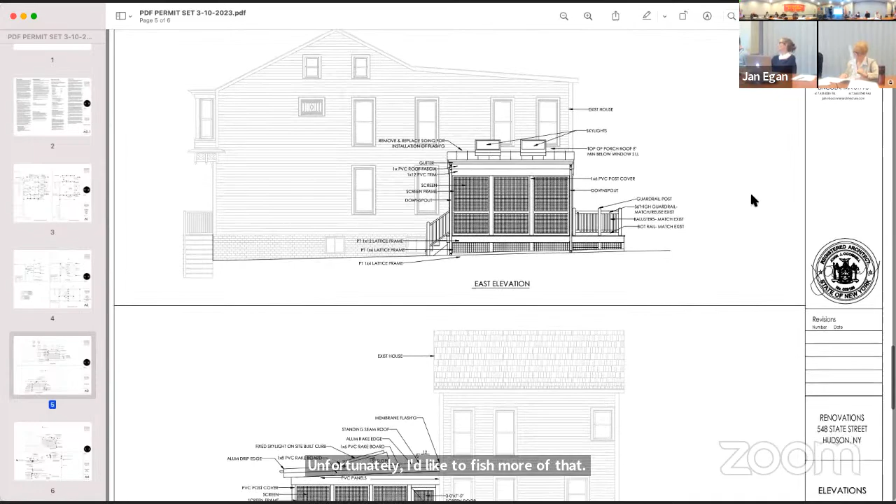And so all the stuff you're taking from, for details, it's from what was there for the deck, the new deck that exists, right? You're not taking anything really from the house, it's from the deck that was there. Correct, yeah. This is State Street, this is facing State. Yes, it's facing State Street, correct, yeah.

And all these doors, front and back, will both be. Okay. So the open part of the deck is not facing State Street, correct? It'll be in the back, behind. Where's your handle?

And then the current photograph is all open now, so all the screening and roof are... Correct, yeah. Basically an extension of the existing footprint, taking up the existing deck and putting in some new footers, extending the deck out in the east area.

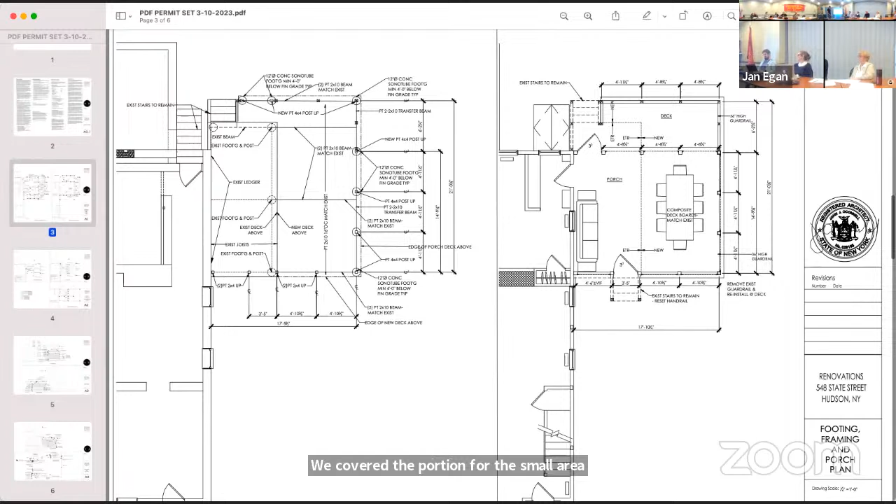Can we see the photograph of the front of the building as it is now?

Continuing to use gooseneck lamps on the exterior.

Let me see the street view one more time, first picture. And this is...

And the top part of the house is clapboard and the bottom section is done, or is it all? I believe this is something. And they have both solar panels - is that what that is? Yes, they do have solar panels. It's just a previous... It'll be a standard screen level.

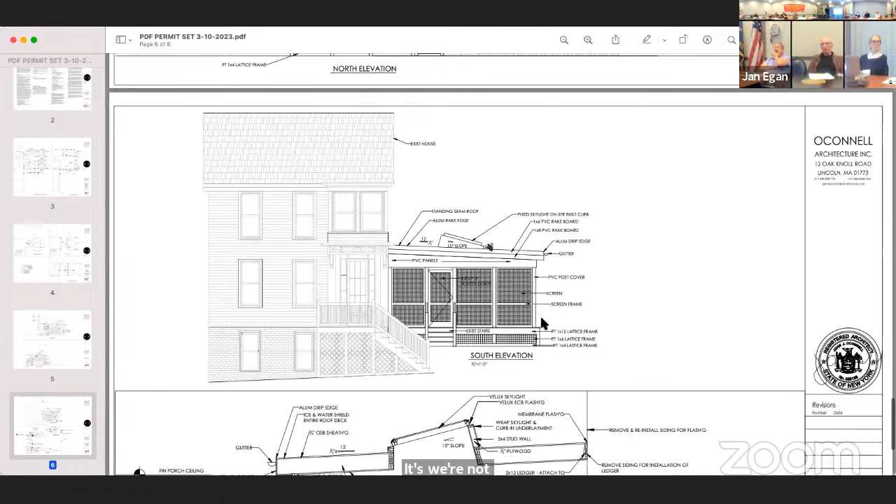Guys, pretty clear? Yeah, I think I like it. It is what it is. Just changing the materials to make them accurate. We're not interfering, I don't think, with any distinctive historic structure, and it's a nice looking piece.

Motion, all in favor? With that contingency, you'll have a COA.

Thank you very much. Craig, just real quick, for the application for the actual building permits, you said you need 2 stamps. The building permit itself? I only need one of them, but I need 2 sets of the drawings, but original stamps, correct? Yeah. Okay, all right, thanks very much.

So what, the railing, PVC, is that thing? No, the railing will continue to be as it is now, it's cedar.

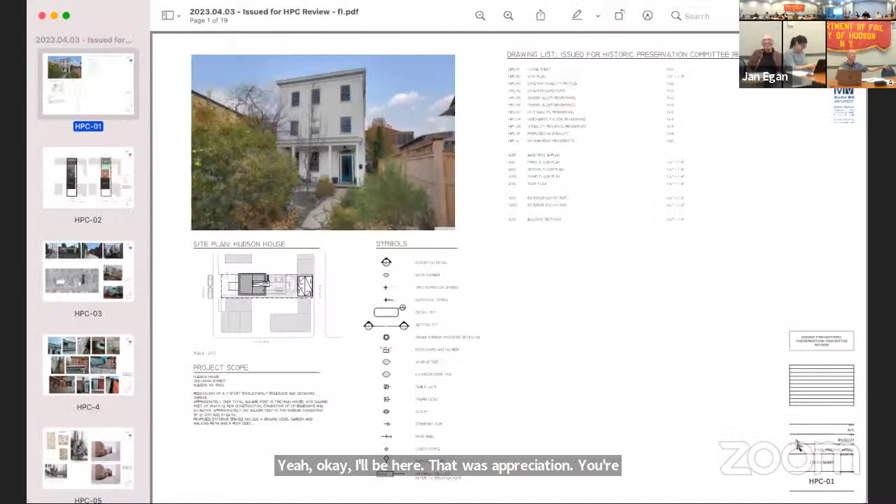So it's interesting, not everyone but most of them. All right, so thank you for the feedback. We have taken it to heart and prepared, I believe, everything that you need, and it's somewhere buried within this. I think what's best to do is I won't go back to the history. If there's any questions about the history we can maybe ask. No, I think we asked her for another application because the previous had expired and so on and so forth, so fine. But it's essentially where you were, is my understanding. I think the question that was resolved before, but we're going to want to discuss is the relative height of the structure, because that's the drama. Otherwise, I believe this is pretty straightforward.

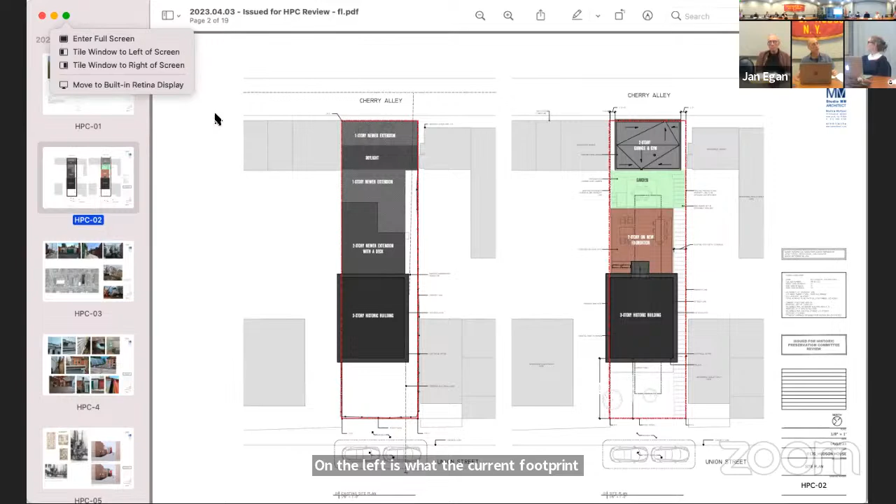Okay, so Dan, go to the next slide. Again, on the left is what the current footprint is. If you work your way from the bottom to the top, you've got the original structure, the addition that was called early 1800s, and the additions that have been added - that 2-story addition that was added somewhere in, we don't know, but it's within the last 100 years. Then there are unusable buildings - it's a structure that's attached to the garage. It goes on a dirt floor with bare stud walls, and then you have an old brick garage. And the idea here is, again, that midsection with the addition has a faulty foundation or no foundation, and it's bearing upon the historic house.

And the decision that we have, the recommendation of our architect, who we've been using, and our builder, who's Peggy, is to take down the addition and then rebuild, which is what I'll show you. So the orange section there is the addition. So we'll take down the old one and add a new one, which I'll describe. We'll add a courtyard, which actually harkens back to the original structure. I'm sorry, there's no slab or nothing under that structure - there is a slab, but it's not doing its job. There is no footing or foundation under this slab. Got it, I see. And there's actually one photo that can kind of peek underneath it. So that gets removed and then we put the garage in the back.

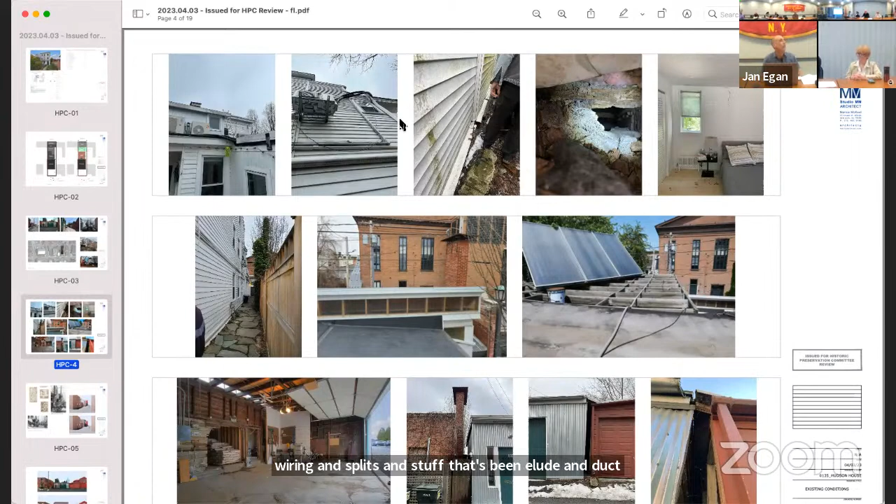This is just various photos of the areas that are in disrepair. I'll also add that there's a potpourri of wiring and splits and just stuff that's been glued and duct taped to the sides of the place. We're gonna not preserve that.

So then this is where you start to get a glimpse, a first look at what we're proposing. On the left side are what we found in the historic maps along with a photo, which describes our building, the historic one, before the additions, green space, and a two-story barn.

And so what we are proposing is adding an addition, adding some green space, and then replacing the garage with not a two-story barn, because we have cars, we don't have horses, and instead put the garage there with a rec room above it. So that's exactly right there.

So now the next photo is where we start to get a look at the old and the new. This is where we paused last time and started to have some discussions.

I guess to start with, the height of that, which is one question, is 20 feet 6 inches, which is actually a little bit below CJ and Misty's, which is the red. It's a little bit below that. So that's the height. I'm sorry, Bruce, what the building on the right that you referred to, this color is?

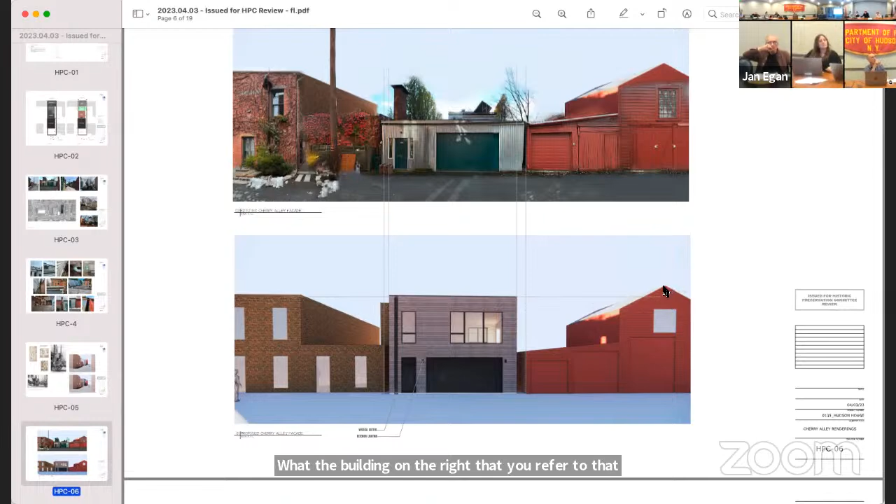That's a garage with a barn on top of it. You can see this, this is the garage section. Yeah, and that's the barn, I see. This is attached in some funky way. And that's your neighbor. That is our neighbor, right? Yeah, and so—

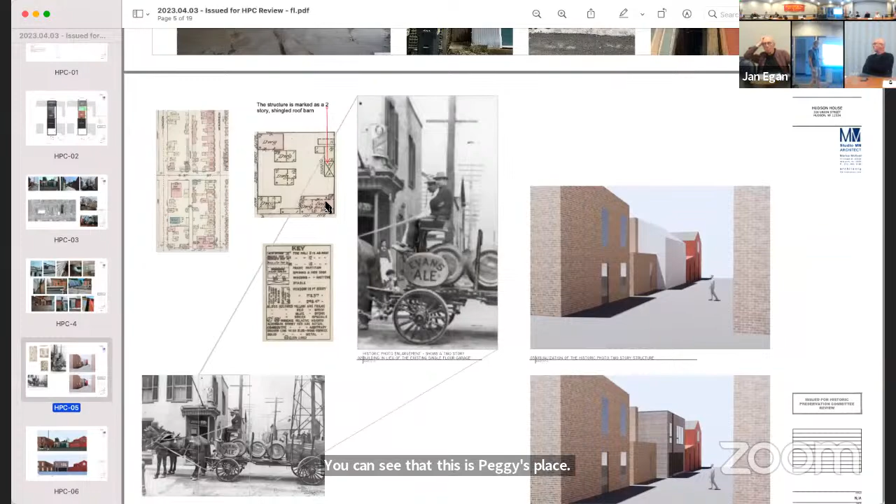In this photo, if you go up a little bit, this original lot, which we are here, you can see that this is Peggy's place, on the corner, and this would be our barn. So now if you go, there's a gap there. If you go back up to here, this gets tucked in here, but this piece is not original, right? This was a 2-story unit before. It just happens to be now flush with Cherry Alley because this one is into it.

Do you have questions about this, or do you want to go through and then I can talk about materials? I had to step out, but how do you know this was a 2-story structure before? Because this map from the fire and casualty—Sanborn maps—identifies this. And then if you go to the legend, it says it's a 2-story barn with a shingle roof.

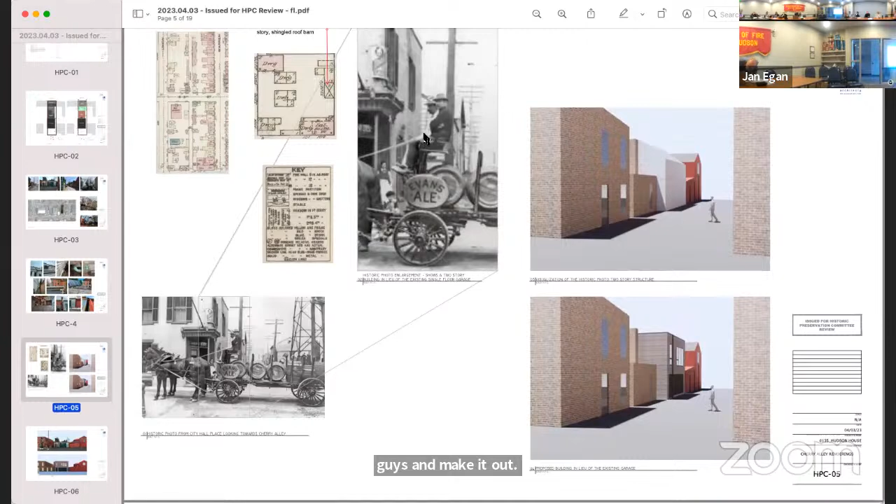And then if you go to the photo, if you look to the side of the guy's head, you can make it out. That's what we rely on. There's some degree of precedent on the block with the neighbor's barn there, that there are other 2-story structures. I understand. So let's go to the next one.

So that's the view facing Cherry Alley. If you go to the next one, this is the view that would be facing from City Hall Place, looking west. That's current, followed by proposed.

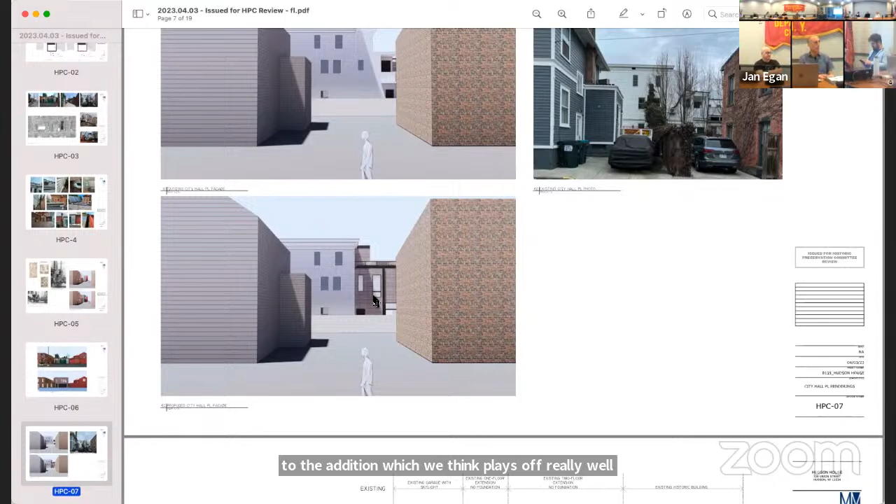And what you'll start to see is we're taking a contemporary aesthetic to the addition and the garage, which we think plays off really well and actually highlights the original historic home versus the non-contemporary, non-historic conglomeration of what's going on today.

So if you go to the next rendering—this isn't visible from any public view, but it does give you the best sense of what's going on. This is what is seen from our neighbor's lawn. So I would walk you through.

This is the original, this is what we're proposing to be added. So we're going to take this down and this garage down, rebuild this 2-story structure with our new 2-story structure, add the courtyard and put the garage here. Obviously this doesn't have foliage and whatnot, but that is what we're proposing.

And again, we'll go to the materials, but this is going to look different than this by design, so they play off each other, and we think it's very nice.

And what do you know about the date of construction of the parts you're taking down? We don't know much about it. What we know is it's been renovated a few times.

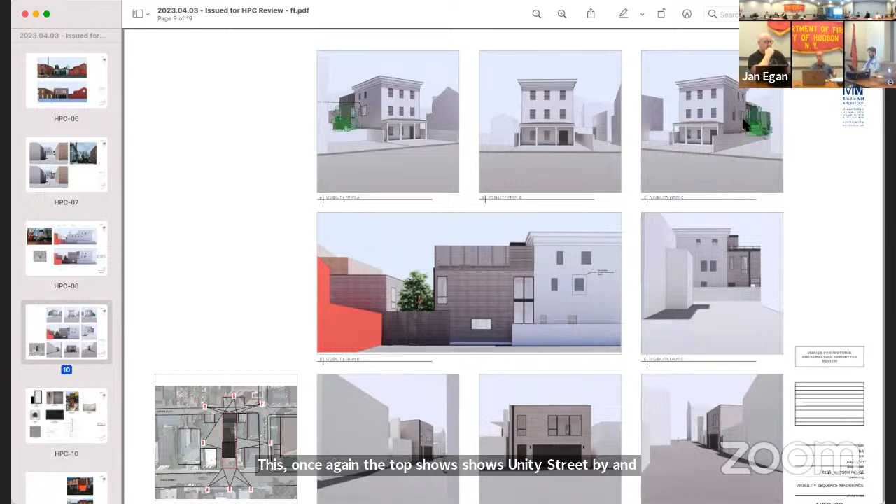If you're looking at it and walk into our yard, you might see it, but it really isn't going to change Union Street. The Cherry Alley side does add something, but there's that modern building, there are other modern garages on Cherry Alley, so it's not breaking precedent or setting precedent.

No, it's not. The alleys are going to be transformed, there's just too much pressure coming on the pavement. And then the issue is to do it well.

Okay, so you want to talk about some of the materials? I know that was a question before. Well, I have a question, which is, when we take down a building and put up a new building, we generally have a public hearing.

We haven't had a public hearing on this, have we? Not in my recollection. The only thing I'll say is he applied a year ago for a very similar, not the same, project. Was there a public hearing?

Must have missed that one. I think there was, Craig, do you know? That's my recollection, I'm pretty sure there was. I believe there was, because the specific concern was what you said, on new structure and the height of the project.

So this garage was already approved? No, slightly larger, it was a smaller, it was a little lower. It was a bigger building with a roof deck, and it had a little bit more elaborate railing.

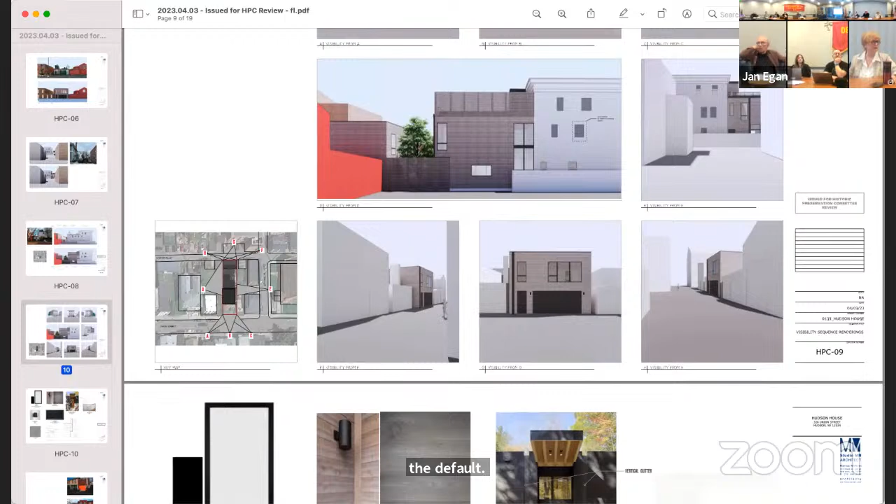I don't think whether there was one before or not is really the issue. If the other was a modern building and a modern garage, and this is reduced in scope and scale, it's just a modification to what was approved, maybe you don't need another hearing. If there was not a hearing, then going from what was to what is proposed seems rather drastic, and we should do that.

I think in view of what Phil just said, which I agree with, that the alleys are being transformed, it's wise to have a public hearing to mark this transition, so we bring the public along with us and we don't have people saying, wait a minute, that's a lot of things.

But you've waited a year. Well, no, I didn't want to get started. I know, but it's too... Okay, thanks, sorry, like, thanks.

It's up to you all, if you think it would be helpful. What does the public hearing entail? Just do it as a part of it.

To some extent, it's more of a legal process than anything else, but it plays a role in our process. What happens is you'd come to, for example, the next meeting exactly like today, and we'd have the same opportunity to deliberate and so on.

At the front end of that meeting, let's say we call the order at 10, between 10 and 10:30 there would be a window for the commission not to speak, for the case to be presented, and anybody on Zoom or in the room would have an opportunity to make their comments. So the theory is we've acknowledged the public as part of our process in a formal way. There's a notice that goes out to the newspaper and so on. Then our process is basically identical. We absorb that information, have the same meeting we had today with the addition of public input, and we vote on your project.

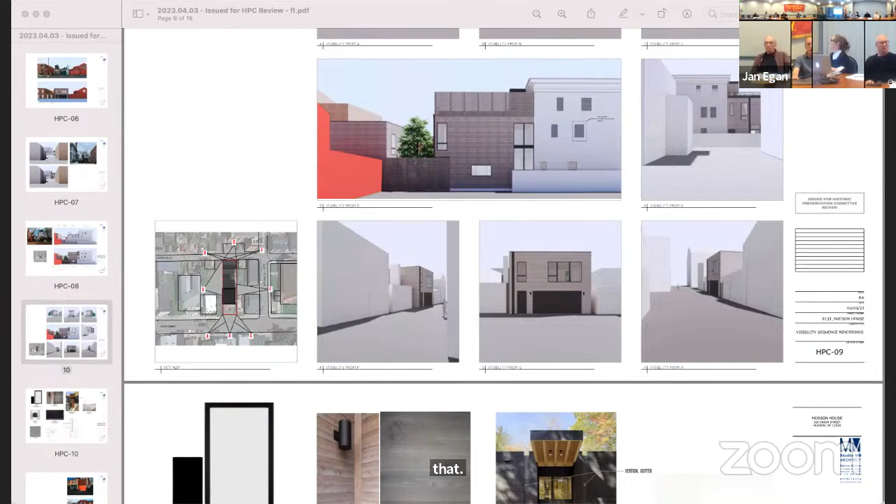Yeah, that was the impetus of this whole change, because we had to do something about it. Did we have a public hearing? We had a public hearing, but the demolition of this house was not part of that public hearing. To me, the demolition of the newer part of the house has to happen — it's falling down and stressing the original structure. That in itself would not necessarily trigger a public hearing.

It's the new construction that matters. The demo, we're going to demo to here. Now we're demoing to here, right, where the old structure already was. So that's the difference. Let's do this straight up — commissioners, do you want to waive the public hearing or not? What do you all think?

Let's poll it. What's the question — should we have a public hearing? You said we should? I say no — is that a no? Yeah. Miranda, what do you think? I actually think the new design is less intrusive than the previous one. I do too. What about the change to the house? It doesn't bother me so much because it's really not visible from the street, and if there is a structural necessity...

What if that was an original part of the house — would that change your opinion? Depends on the design. There are a lot of buildings in Hudson that have these back sections added on, with outdoor stairways — many have juts and stairs, and pretty flimsy ones, and we've approved a number of them to be demolished.

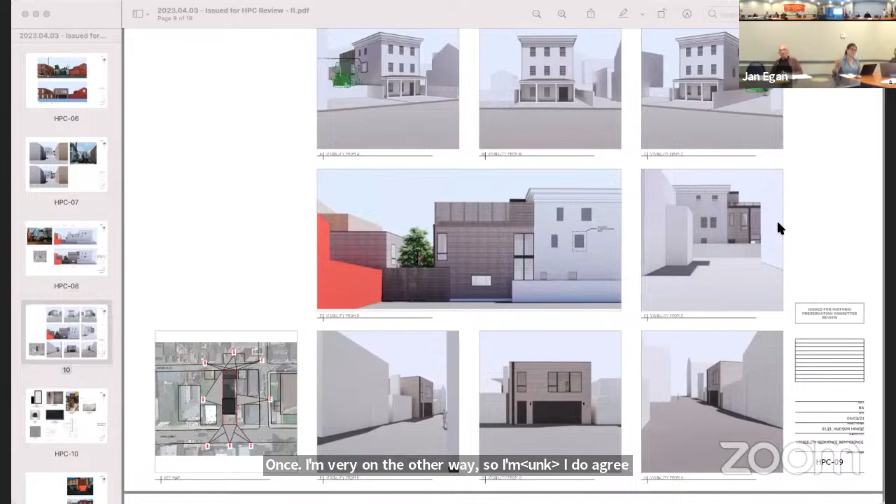What do you think, Diane? I'm very much on the fence — it could go either way, but I do agree it's a simpler design than what was done prior, so I feel comfortable about that. For the back, since there's a precedent, sure, I don't think we need a hearing, I feel like they can make it work.

Fine. Are we approving it, or is this just a concept? No, it's going for approval. I just wanted to get people's views on the public hearing, so we can go ahead and vote straight up or down. Okay. Did we cover the materials? Here's all the materials, yeah, they're all covered.

The siding is wood siding, horizontal, not vertical. I know there was a question about the vertical. Yeah, I think Chip had raised that.

I think the railing is probably less indicated. It's going to be metal from a local vendor, or metal source.

I did have one question. You showed examples as precedents, the Corten steel. Do you have Corten steel in this? I didn't see it indicated anywhere. It's a precedent in the HPC package showing a neighbor's Corten steel facade. Is there? I just didn't see it on any of your drawings. I think it was representative of a contemporary modern style. Got it, okay, I see. Okay, thank you.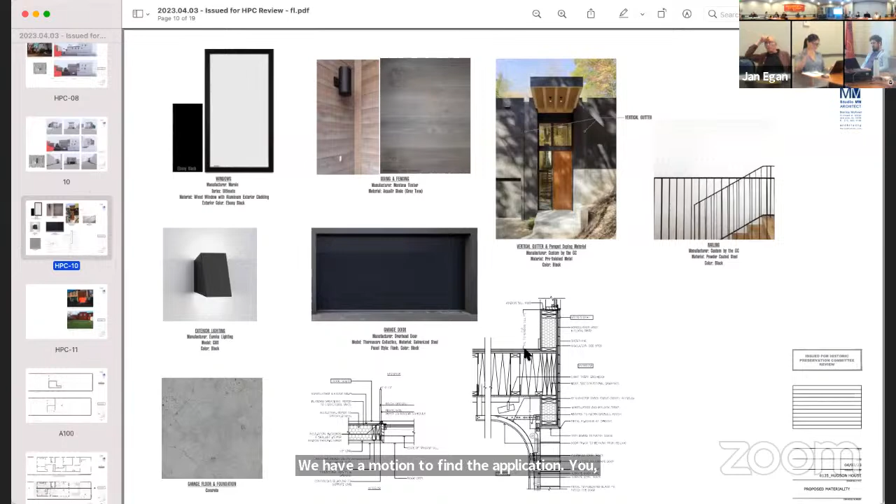Motion to waive a public hearing as we just discussed and ask the city attorney to prepare a COA. Miranda, Bill, I'll second that. In favor? Any opposed? Thank you very much, all right, congrats.

Thank you for bringing up the public hearing. That was good, it was important to discuss.

Jan, what do we got? We have TJ Auto, 735 to 737 Columbia Street. TJ, are you here?

Yes, we are here. Oh, terrific, thank you. You're welcome, and I see Esther is still with us. I didn't know this was going to go quite so long. Sorry guys, it is what it is. Thank you for hanging in. So go ahead.

So we were at the meeting last month, and this was the first time that we spoke with you all. I'll share my screen just to refresh some of the stuff that we talked about, but we're looking at 735 Columbia, the site of the former TJ's Auto. We presented some of the building history last time and are really kind of zooming into this interesting typology.

This combination of more domestic architecture and a more commercial use, trying to restore the building back to some of these original colors while adding in some of the newer elements specific to Lil Deb's, who's the client and will be the new restaurant in the space, specific to their identity.

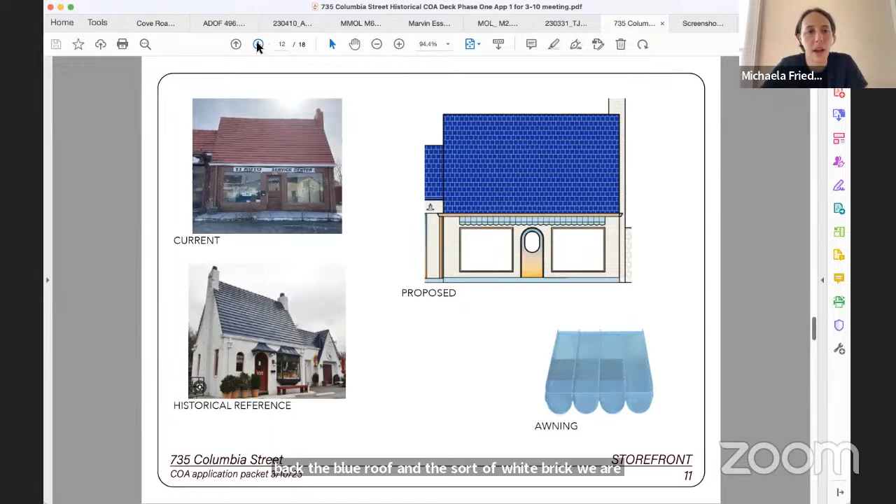So we looked at a few elevations last time, looking at bringing back the blue roof and the white brick. We are not probably going to do a pristine white, but more of an off-white in keeping with some of the other buildings in the area. It's all painted brick right now and painted wood shingle, which we're also keeping those materials.

We're kind of restoring some of these old awnings that used to be over the building and bringing that into our new design. And this is the color palette that we looked at last time, again bringing back in that blue roof. After we spoke last time, I think the most curiosity was on this new addition that's going to the right of the building.

You can see it circled there in red. I think we wanted to take a closer look at that, look at particular shingle types, look at different options for fencing around it.

So we put together a new little render on our updated drawing set, which has the 2-dimensional elevations with dimensions and notes. We also added in a few images of these 3D renderings so that we can understand the massing of this addition on the right, because it does have these slightly pitched shed roofs to mirror the existing ones on the other side in the rear.

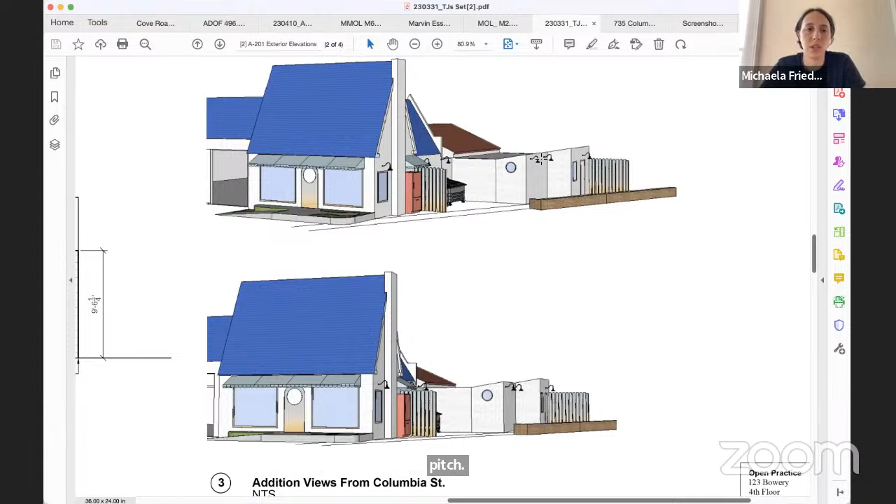But it is set back from the street quite a bit, and I think that was some of the, I won't say confusion, but sort of question of how that would be perceived from the street. So really wanting to show, because in the elevations, it looks almost equal or in plane.

Let me go up. Oops. No, it's set back. Yeah, exactly. So there it is on the right.

And about the garage doors, just remind me again what's happening with those. Those are being preserved. So we're working with all of the windows on the front, which are these really nice, very narrow frame wood windows that have been there since the 30s.

We would like to preserve those for the character of the building, both inside and out, but we will have to meet current energy code because even though we're in a historic district, the building itself is not historic, so we're not exempt from any energy code requirements. We're working with a window company called Allied. They do code compliant storm windows that have a metal frame, very narrow, that you attach to the inside, and they're removable. So from the outside, the look will be preserved, and from the inside, it'll have new storm windows with insulating properties.

Are those overhead doors operable? They are. So what would happen is you roll them up and still have the interior window glass? Not in the summer, since they're removable, so it would only be in the winter. I understand, and it's nice, it's really cool in there in the summer because it's all brick construction with a concrete floor. So we have some nice self-regulating properties of the building, and we are adding all new insulation to meet energy requirements as well.

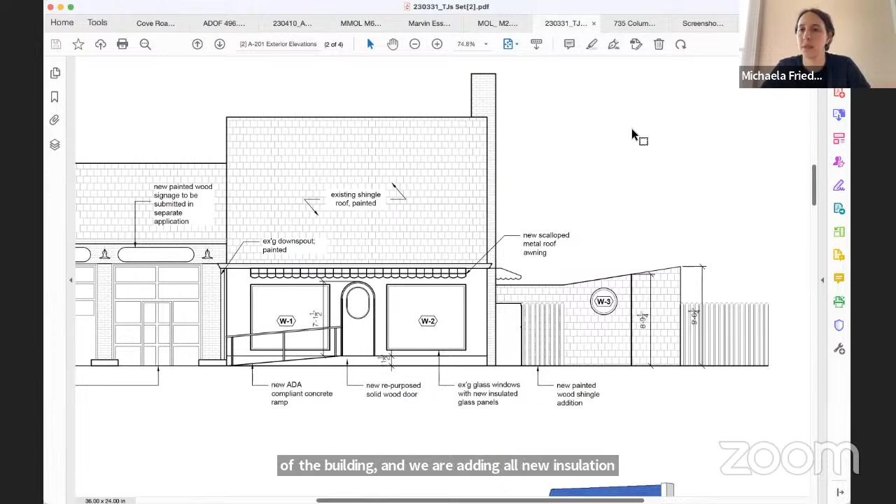And that will be done from the inside so as not to affect the visual appearance of the brick from the outside. So we're looking at this addition on the right.

One of the comments from last time was maybe to add a window on that facade because it was formerly just shingle and looked a little bit stark. So we have this new W3, this porthole window, which that language is also taken from some of the more curved doors that were in the original Pure Oil stations. So we've added a window in there. I don't think we want to make it much larger because it's a storage space, so it's really just for facade continuity and bringing some light in for people working in there.

But I appreciate that. The commission raised a question, and you could have pushed back and said it didn't make sense, but about the blank wall, I do recall that question was raised, and there was a way of creating relief from that. I think it works well with the rest of the facade. I appreciated the comment from the commission, I think it's nice to have a little something there. Those details are what will make the building special and unique and have character, even on the newer construction parts, so happy to add that in.

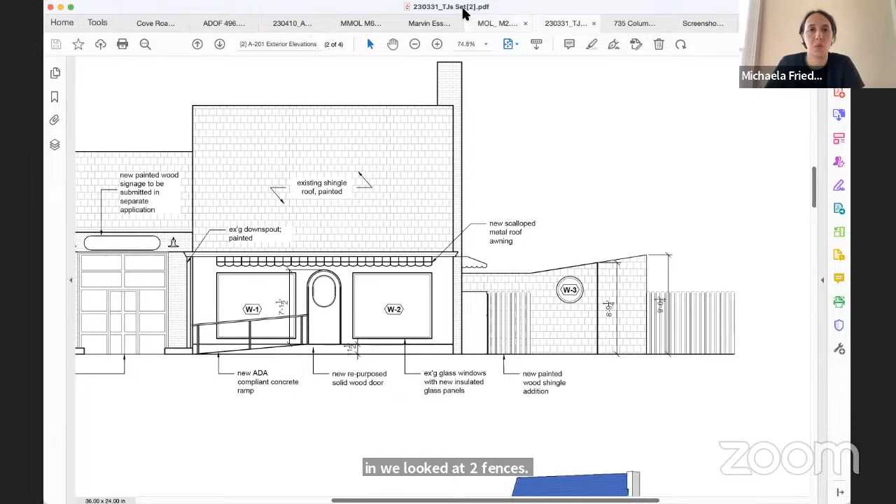We looked at two fences. So we're going to do wood slat fences. The first one is screening the trash, which is here. The dumpsters are located behind, but there's still enough room for the trash to be picked up, it's just visually screening from the street. Lil Deb's right now has a community fridge that sits on Columbia on the sidewalk, and they would like to keep that program in this new space for the community. So that will just be on the side of the building here, but in front of the screen. There's this wood slat that will separate between the fridge and the trash, which you can see in this 3D image here.

Does the fridge need to be enclosed or just open to the elements? It's underneath an awning, and it doesn't need to be enclosed. It's more about the experience of people coming up to get food, and to protect the longevity of the fridge, so we don't have to replace it constantly.

So that fence was added, which is something we looked at before, and all of the doorways, the areas that signify movement, have this gradient of the three colors in the scheme, and that would be applied to the fence as well. I think it was really just wanting to get a more sense of it in 3D, and understand that it is set back from the street.

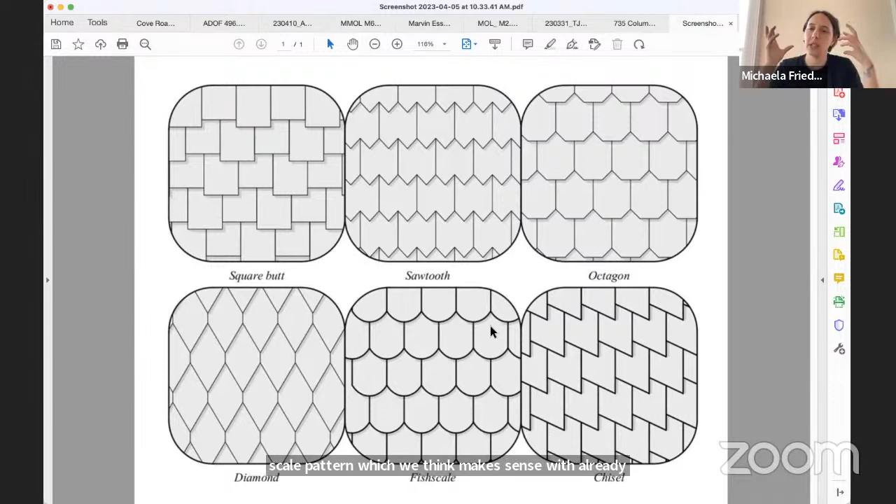One thing I also wanted to share with you all is the shingle type, because there was mention of that at the last meeting as well. We are going to go with probably a red cedar - this will be a little bit of a cost determination - but a cedar shingle for exterior durability in this fish scale pattern, which we think makes sense with already the rounded language of the doors and the windows, and it's almost a bit more domestic. So we think the fish scale pattern works well with that language.

Those were the issues I recall from the prior meeting, and I believe he's addressed them. Yes, okay.

Motion to waive the public hearing, ask the city attorney for COA. Miranda, you, all in favor? Any opposed? Okay, that's great.

Craig, we voted in 2 weeks on the certificate. You can pick all your stuff up from Craig, 2 weeks from today, or give or take, or the Monday thereafter. Okay, wonderful. And that's for the COA. Wonderful.

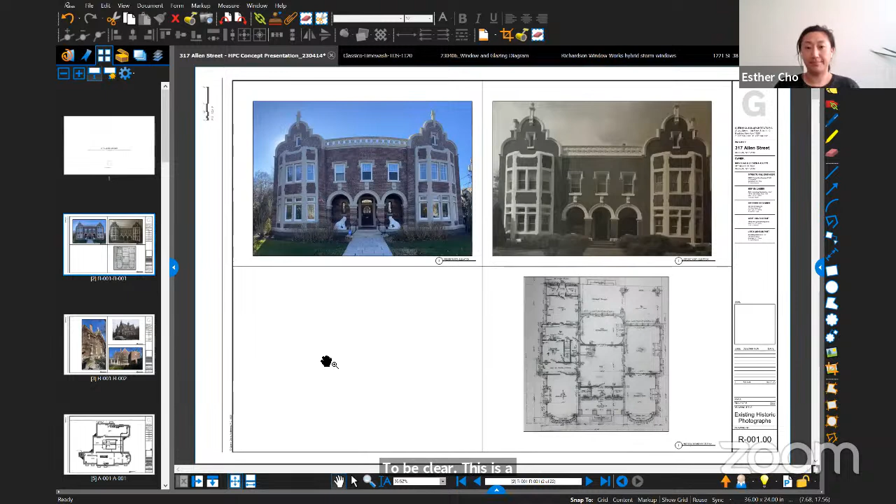To be clear, this is a concept, John. Yes, we're not, yes, okay, keep on. Oh my God, I know that building.

So here's the historic photo we found in a book that's actually on site, and you can see it's largely the same today. We're proposing to do very little to the front facade windows, as well as the second main facade on Willard Place.

What we are proposing the major changes to are the sunroom windows, which are visible from the street, but we don't believe are original. This was an exterior patio when originally built. We're proposing a new masonry opening off of what we're going to be turning into the master suite, but we'd like to reuse the brick returns that currently exist on the exterior facade and just demolish the masonry in between. We are also proposing 2 large windows in what will become a double height kitchen, actually 3 large windows if you include the rear facade.

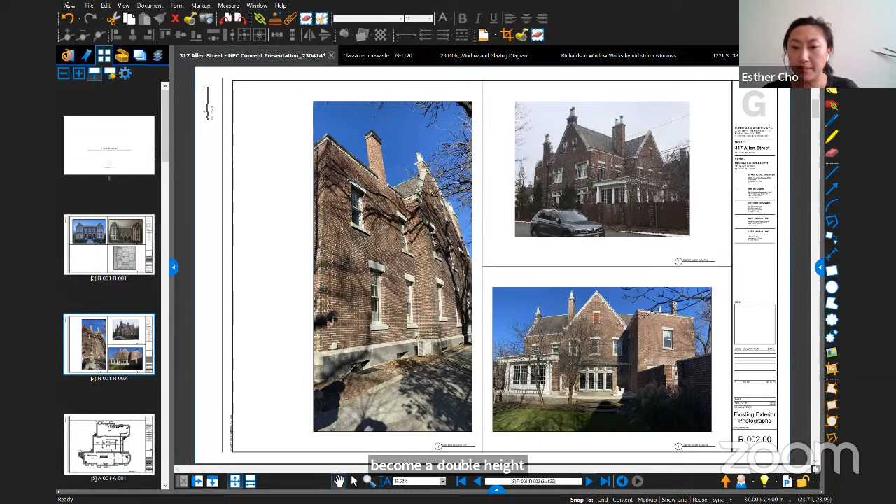Then maybe I'll just skip to the elevations. So here's the existing north elevation. Sorry, can you repeat that? Just the next door neighbor, sorry. Yeah, don't worry, there's someone on the other side of this room talking.

And at the time we submitted this, we were planning on replacing the front door, but I think the scope is now just to replace the hardware. Is it original? Doesn't look like it. We believe it's original, it's hard to tell in the photo that we have. That entire front porch is in shadow, but we're happy to leave it.

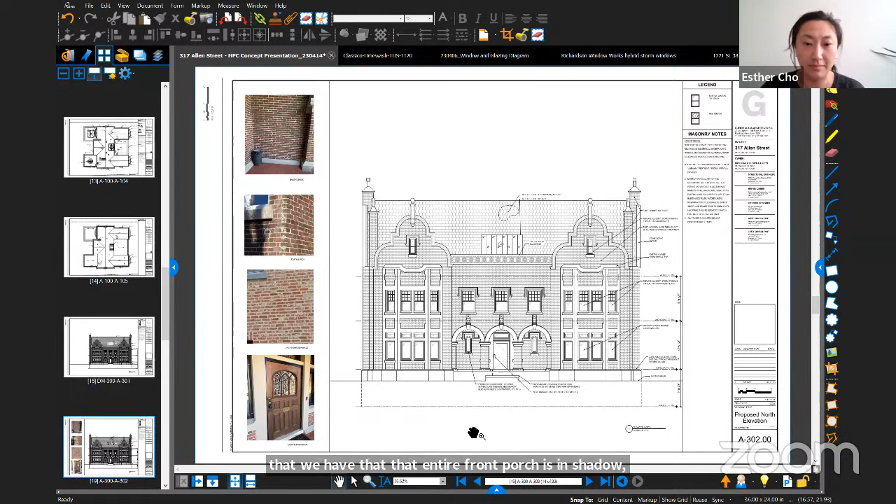Okay, if we swing around to the, this is the east elevation. The house has a combination of 6/1, 9/1, and 12/1 windows. I think the majority of the existing windows are 12/1. We are planning to restore or repair all of the original windows, as well as replace the storm windows for those.

And if I skip to the proposed elevation, you can see there is one new wood window we're proposing to replace a current service corridor door. There used to be a sort of not patio, but a little landing for steps coming from the side driveway. So we're going to replace that with a window to match what's existing. And then here are the larger kitchen windows that we're proposing.

Go to the existing rear elevation. You can see the sunroom with the, I guess, more recent glass infill, and you can see the master bedroom doors.

We believe these two small kitchen windows are original, but the brick molds on the exterior are not. This window doesn't appear to be original, and the kitchen door isn't either. So what we're proposing on this elevation is another one of these larger windows, replacing the door with a wood panel with a glass light patio door.

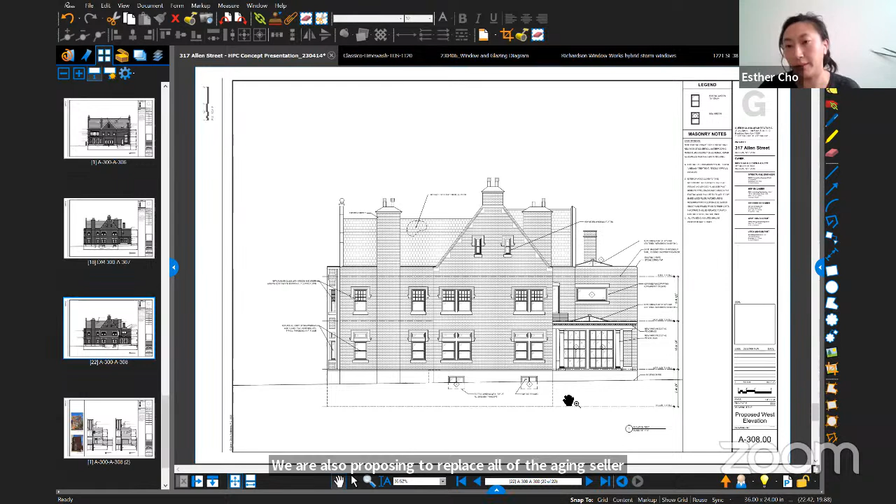Here's a side-by-side of a partial elevation. This is the kitchen wall. There's an existing door with transom—the door is not original—and a small double hung window. To the right, we're proposing a series of wood stile and rail double doors with glass lights and a larger fixed window above.

This last image is just to show some of the references we had in mind for the window type. For any of the smaller double hung new windows we're proposing, we would be using Kolbe & Kolbe Heritage Series, which is all wood. It has the thin beveled muntins, just to replicate the historical style of wood window.

For the cellar, as I mentioned, we're using the same Kolbe and Kolbe line, but aluminum clad for durability. And for the sunroom, the master suite, and some of the replacement storms—like there are some dining room doors that have existing non-original aluminum storm doors—we'd be proposing this steel look aluminum system, which we're using for high building performance.

So the window system we're looking at is the Slimline 38, which has fairly narrow sight lines. It comes with a beveled profile, and even the doors themselves have a very narrow sight line. So we want to get your initial thoughts and feedback on the proposed openings and thoughts on the lime wash.

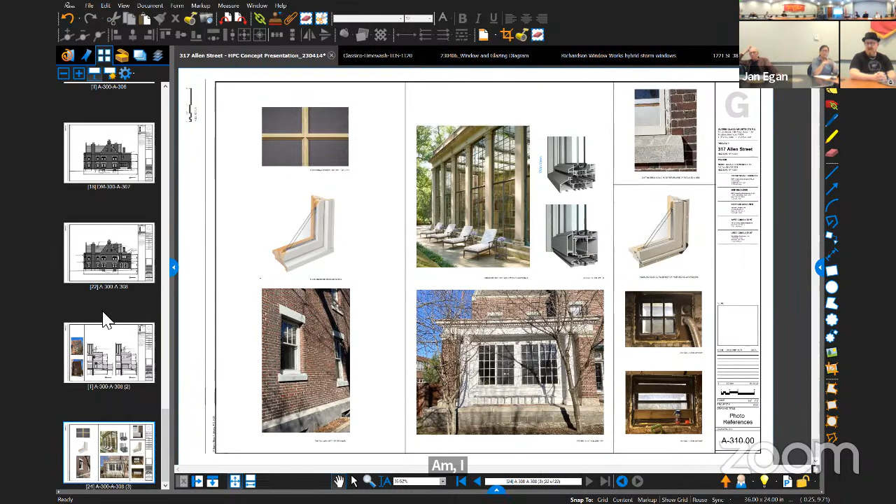Yes, I mean it seems very thoughtful. My initial reaction is I wouldn't do anything to this house without the public's input—it makes me a little anxious at the thought of changing it at all. But it doesn't seem like you're proposing anything outrageous. I tend to agree—this is a pretty significant building, and I think we should walk the public through it. But in terms of what they're proposing, I think it's all very sensitive and beautiful.

I agree, sorry. In advance of that, the lime wash—I don't quite understand it, no one's ever brought it before us and I don't know much about it. Is it just for the aesthetics of it? And it would just be for the aesthetics. Is there some kind of precedent for lime washing historic brick houses? I don't know, but I suspect that question will come out—like, why do we have to lime wash this?

That is true, and I'd love to see a sample of what it might look like if that's possible. We're on Allen Street, and there are a lot of painted brick houses, so it wouldn't be sticking out—there's like 5 or 6 painted brick houses on Allen Street in that block. But this building isn't one of them, it's very distinct. So perhaps if we could see a sample of it for consideration, that would be very helpful.